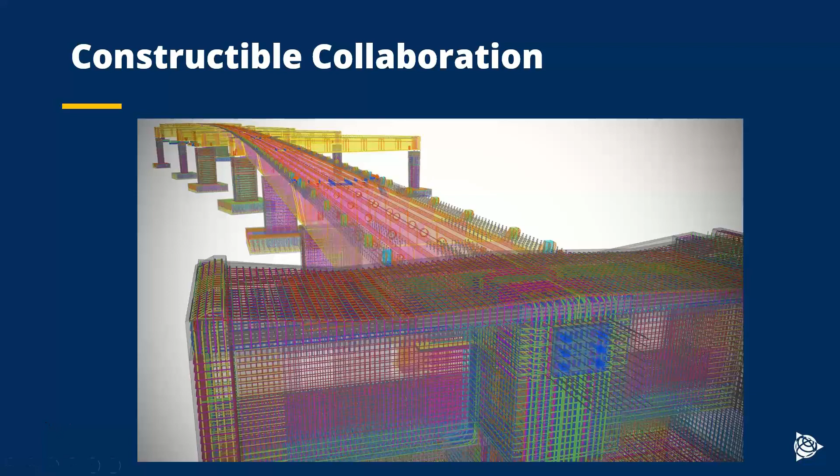So much for the introduction. Now, what is constructable? We'll talk about that. Actually, this is a strength of Tekla. We are well known for being able to produce constructable models and also tools to use the constructable models.

If I may, maybe you missed this, let me just go back a little bit. You can see this is the model of the Tekla structural steel, and this is the rebar with the structure steel that I haven't inserted yet. So if this is how it actually looks in real work, this is as real as it gets on site.

So what's so important about that? That's what we are going to talk about in relation to BIM. For the next few slides, I'm going to talk a little bit about constructible BIM using concrete construction as an example, as I mentioned.

Because we are going to go in depth, constructible BIM covers different disciplines of things: precast, even curtain wall, temporary works, bridges, RC structures, vertical structures, composite structures — all fabricated by different people. So it has different modeling if you go down to it, slightly different, but the concept is the same. It has different advantages, so we'll just take one concrete example.

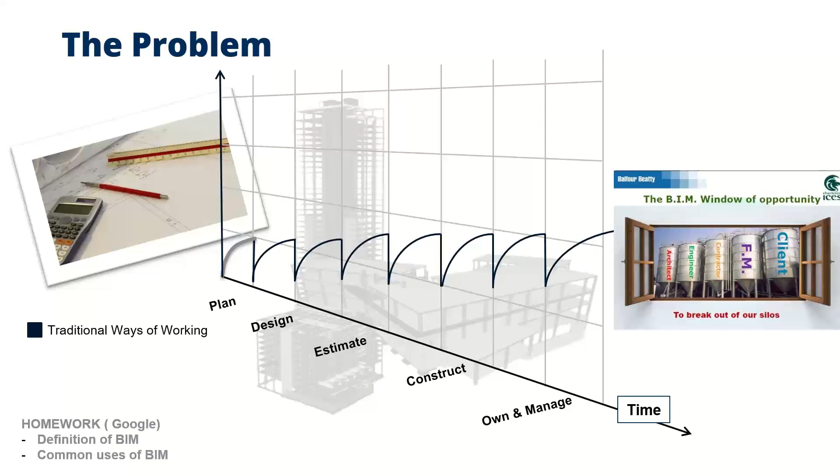All right, so if I'm throwing a lot of things here, generally to share a bit more with the BIM. So the level of development - this is a BIM model example, and then your M&E, structure, steel, whatever you have.

So not all BIM models are done the same. If you want to go to construction, you have constructable BIM. Apart from the concrete geometries, we'll tell this is concrete or what kind of grade of concrete and things like that. You also can use the model to do the casting planning, that is the use of the model during construction.

You need to know the embeds location so you know the reinforcement fits in and can be installed. And you can call up what rebar is needed, the bar bending schedule. You can either cut and bend on site, or order cut and bend rebars, and you can also quantify them - how many of them is it.

You also have temporary works that you can, if you want, do it, but it can be done, and then you can better coordinate your work as well. And then whatever you've done, you connect it to your survey equipment, the robotic survey equipment, to do the auto layout on site to get it accurate.

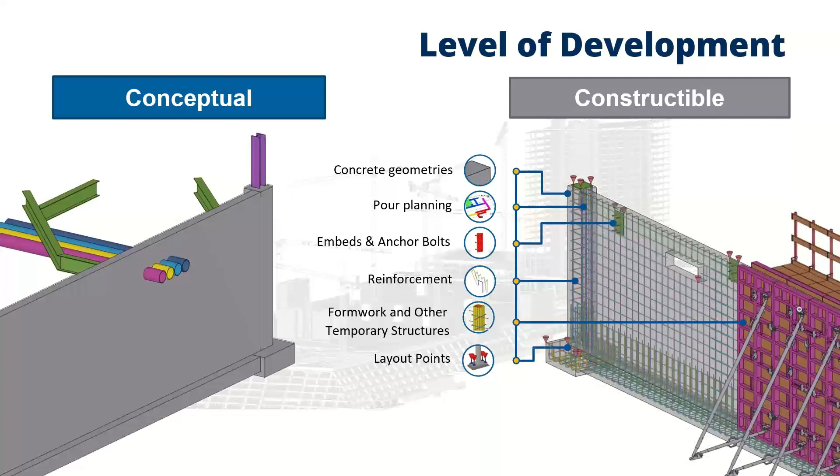So this is just an example, and then add in the rest. If it's structured steel, then you have bolts and welds, even modeled. So all this goes to costing as well, and also goes to analysis as well. And then you have M&E trade coming in and do the coordination as well.

So as I said, I'm focusing more on the reinforced concrete. So this is a reinforced concrete example, and a good example of constructable. Basically, the model is as good as what is needed, exactly needed, what is to be built. The data, the elements are represented as it is. The data is inside so that you can extract them out for use.

You have tools to use it for various purposes, for planning or for quantity takeoff and things like that. First, you must have it inside the model. Otherwise, there's no way you can take it off accurately.

So this is what I mean - so one model, constructible model. You use the model during construction. You can use it for quantity takeoff. It's very accurate. You use it for your scheduling or logistics.

You can use it for pour planning and produce casting drawings specifically to the casting sequence and things like that. You can use it to do your formwork planning and detailing. And obviously you can use it to do your bar bending schedule, rebar quantities, and the detailing to make sure

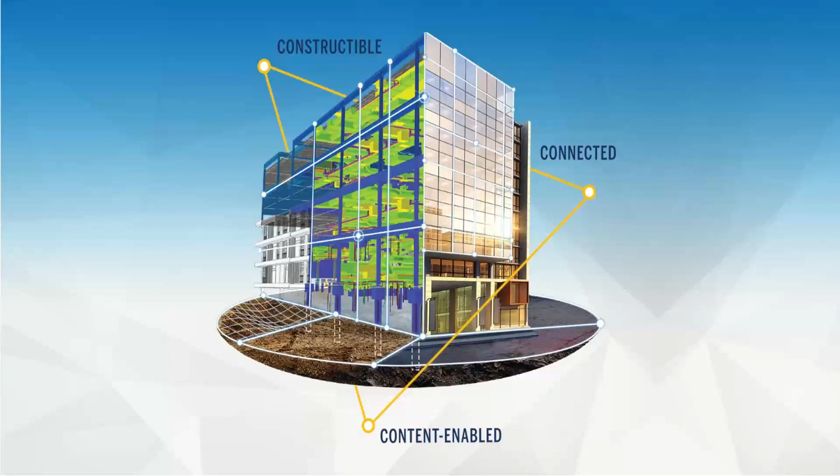Everybody needs to look at the same thing regardless of what software they are using. So connected data, connected people is very important. That's why there'll be another solution whereby in the cloud you can coordinate between the various professions at different stages, and bring this constructible model there to help track the status of the work and have the information at hand, whether it be on handphone, mobile, desktop, browser, or HoloLens, which I don't have time to go into.

Basically, a designer can now design and port the information, analysis, and design over to Tekla, to a constructible model in the case of Tekla. Then that model with the design rebar can be available, and you can start doing the detailing of the rebar plus the constructible model plus the coordination, and then send the information for fabrication. You can also bring the information onto the site to verify, to do stake out, layout, and things like that. So this is the concept of how it can be used for construction.

So as I already have overshot the time, I'm sorry if it's too much for you, but what we will do is continue to learn.

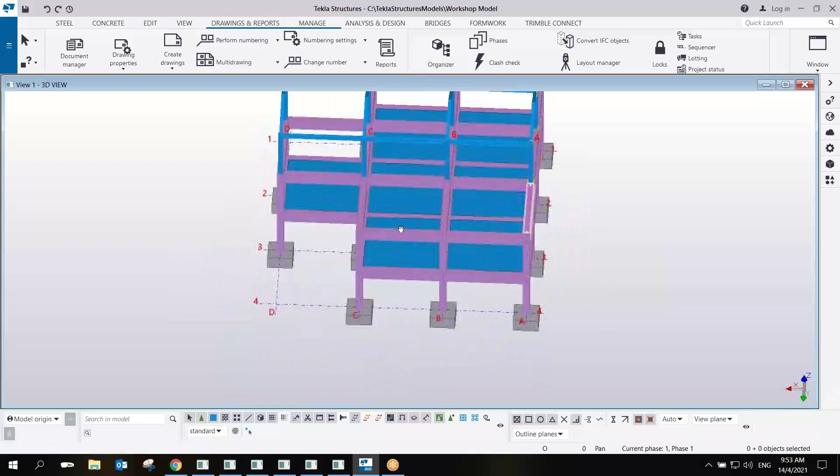If you notice, this is 3D. Since we're talking about 3D modeling software, you can rotate, zoom in, zoom out, and make it transparent. Rotating is simply pressing the control key and the middle button of your mouse and moving - that's how you rotate. Zooming in and out is simply rolling the middle button, roll up, roll down. If you click the middle button of the mouse and move, that's the panning.

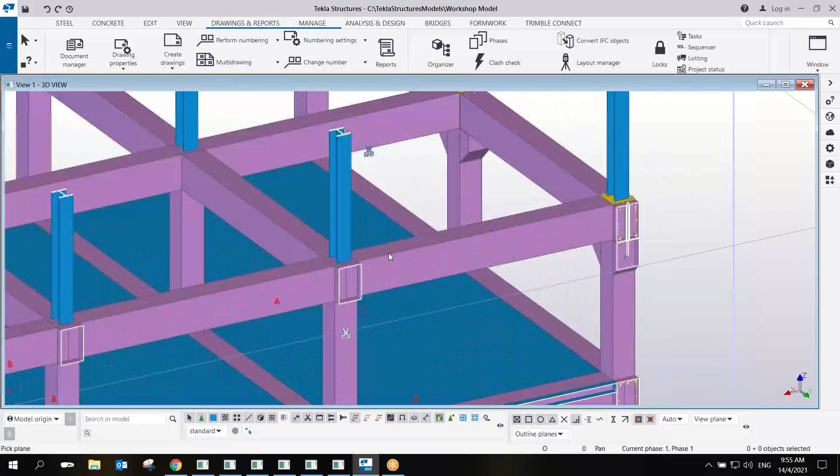If you notice, when you do the clip plane, you can see the information inside. If there is a reinforcement, you can see the reinforcement, and then also the sections like this. And then if you want to remove that, select the scissor and then delete.

So that is how you navigate the model, and then by pressing Control P, it becomes a plan view. Control P again, and this one will become a 3D view.

So now we can start dealing with this model. I can simply delete everything, and then I'm going to show you how we're going to create this simple model. Basically, in Tekla Structures, you have Control I.

In Tekla Structures, there is a grid line here. If you double click the grid line, as you can see, you have the coordinates. This is where you start the model. When you create a new model, you can have the grid line automatically by default, then you can change the value of the grid line. So this grid line, if you notice, there is a 3 into 5,000. Meaning, in the x direction, this is x and this is y.

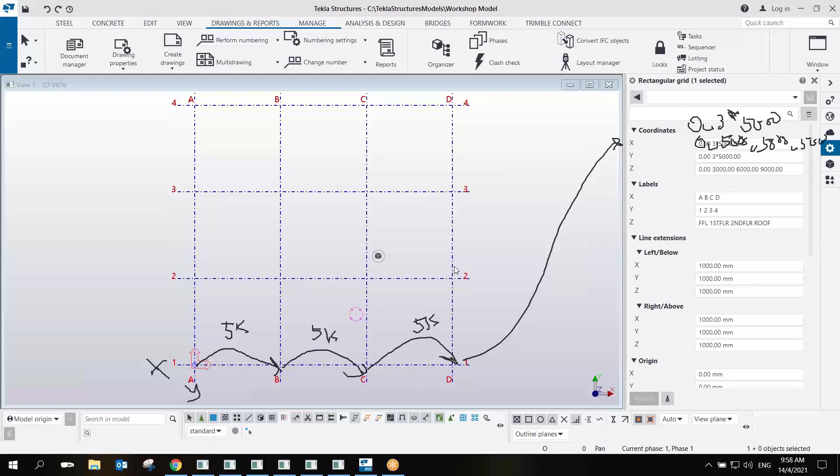So if I erase all the drawing and go back to this, let me just simply change this to 0, 6,000 space 6,000, and then 5,000. If I enter, look what will happen - there are changes in the spacing of the grid line. So if I want to go back, if I type here 5,000 space 5,000 space 5,000, enter, it will restore to 5,000 5,000, and automatically this will become 3 times 5,000. And then you will notice the y direction is the same thing.

Meaning the x and y, this one is what we call a relative value, relative. So this is a relative value, this x and y. Meaning it will start from where it ends. So from 1 to 2, 2 to 3, 3 to 4, and so on. That is the relative value. It's like you're adding dimensions.

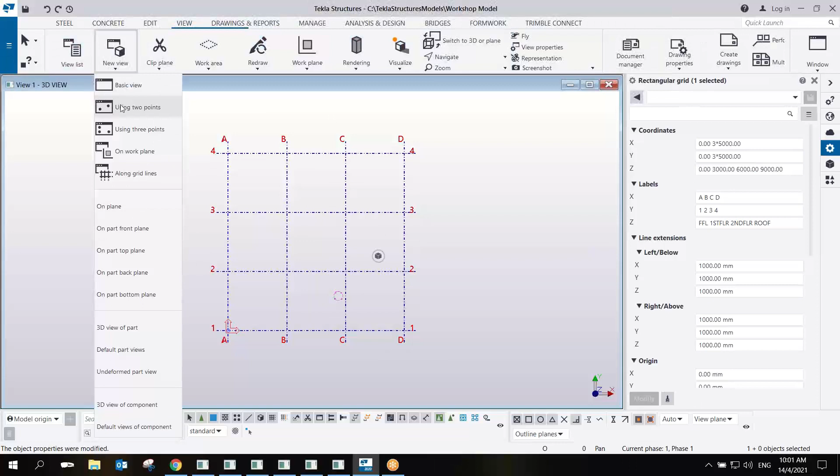Okay, so now for our z direction, for the z coordinates, this one was taken differently. So if I'm going to the z direction, I can go to the view. Under the view, there is a command using 2 points. If I click this command, pick this one and pick this one, so you can see the arrow. Control tab and then control P.

So this is the elevation. If you notice the value here, under this edit you can see the measure. So I'm going to measure vertical distance from here to here. Let me just turn on my snap. So from here to here is 3,000. This one and this one is 3,000. This one is 3,000 also.

Okay, now in elevation, we call this one the absolute value. So meaning for the z direction, this is absolute value. Absolute value meaning the value on the coordinates must always start from 0, from here. Meaning from FFL, or finished floor level, to the first floor, that one is 3,000.

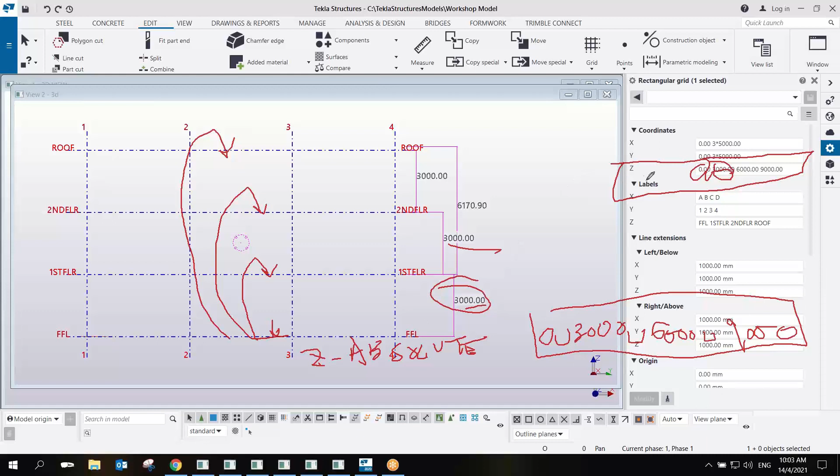Okay, so erase all the drawing and then go back here. If you notice here, so 3,000, 3,000, 3,000, you can see here 0, 3,000, 6,000, and then 9,000. It will be wrong if you put here 0, 3 times 3,000 - that one will not work, and you will not be able to see your grid line in your elevation if you put it that way. So again, X and Y is a relative value, Z direction is an absolute value.

Okay, so I can close this view now. And then since I have now the 3D view here, we can just simply - the label is here, A, B, C, D, A, B, C, D, and then 1, 2, 3, 4. And then this FFL, first floor, is what you have seen earlier on the elevation.

So now what we can do is create the view from each grid. I'm going to select the grid line, right click on it, and then here create view along grid lines. If I click along grid lines, there you go - you can see create. Once I hit create, automatically it will give me the different grid lines. If I open all of this, as you can see here, it will create all the grid lines. But again, in Tekla Structures, there will be a maximum of 9 views to be shown in your window, so maximum 9 views only.

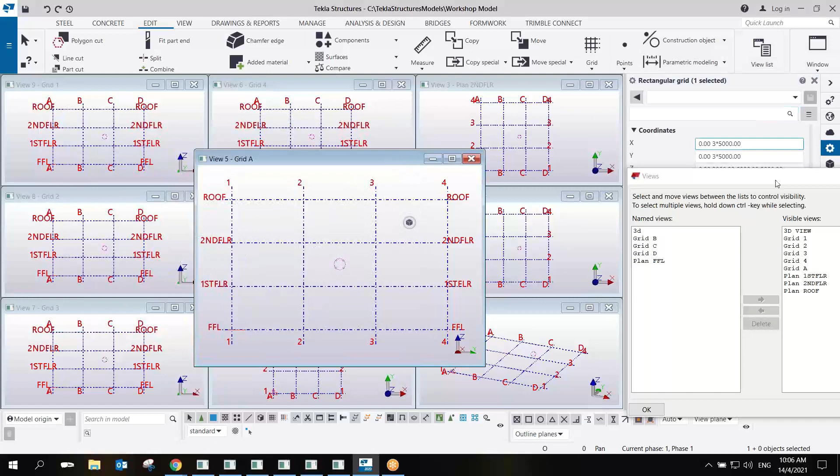Once you want to close all the windows, you can go under this window and then close all windows. And then if you want to see, press control I again, so you can see the view, the named views. So here you have the 3D view.

So you can go back to the 3D view again. This is how, when you close the window, it's not necessarily off, but if you press control I, all the views on the left side will be hidden. Once you put that one on the right side, it will be visible again in the window. Close it and it will be hidden. So if you're not using it, just put that one on the left side.

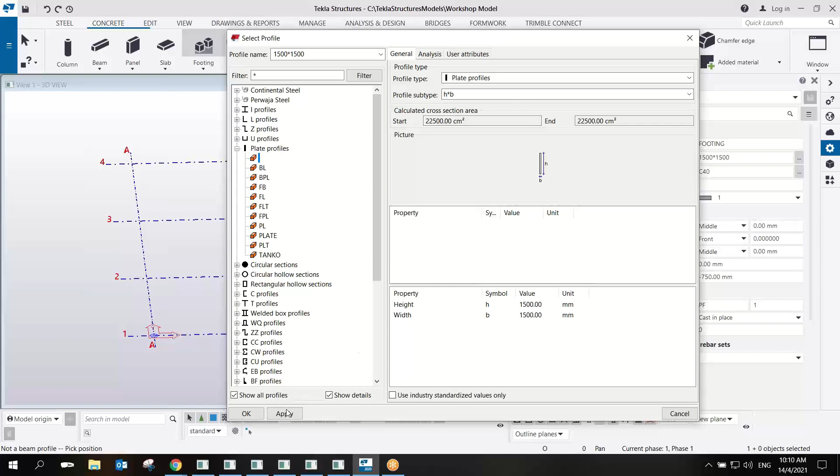If you go to this profile, as you can see here, these are all the profile database in Tekla Structures. As you can see here, we are using this h*b, 1500, 1500. There are many profiles available, but at the moment we're going to use this. Actually it's called plate profile, but you can use this one as a slab or as a footing. And as you can see here, the material of the concrete is C40.

And then the class, and then if I pick here, automatically there will be a 3D model. In AutoCAD, if you want to create a 3D model, you have to just create this rectangle and then extrude. So this one, just simply pick point and then you have a 3D model. This 3D model is not just a 3D view - let's say for example top is 0, this one is 0 on the global coordinates, bottom is negative 750. If I type here negative 800 and then enter, it changed to negative 800, the height of the footing.

Now look, if I inquire this part, immediately I can get the properties of this. So I can even get the report. What report? Let's say, for example, I want to see the area of this footing - I can get the area. I can even get the volume of the concrete in this pad footing. Immediately the system will calculate for us the volume, even the weight of the footing - it will give you the weight. So you don't have to calculate that one using your calculator, because Tekla Structures will be able to give us all the information that we need for fabrication or for site.

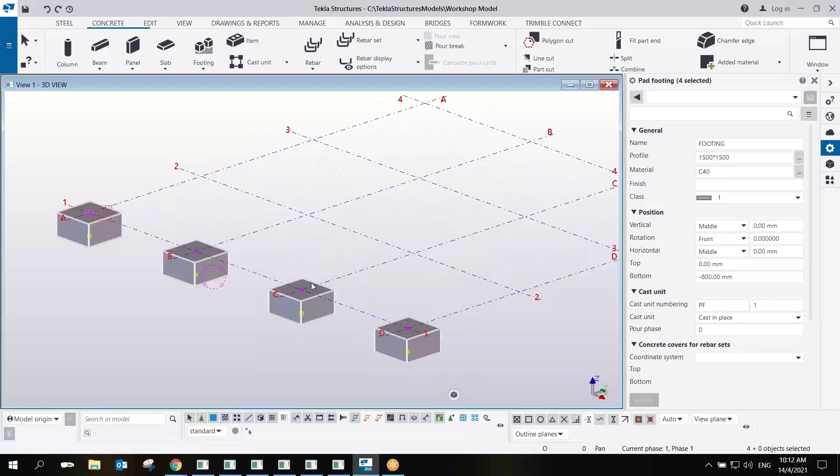And then if you select this one, we have an option to copy. If you right click, copy linear - meaning you can pick from this point and then select the direction. I'm going to copy to this direction. Look, that one is 5 meters. If I click here, automatically the 5 meters will go to the dy, and then the number of copies, how many - 1, 2, 3. So you type here 3 copies and then copy.

So you're going to have all the pad footing to this intersection. You can also, if you like, if you don't want to copy, just simply click the footing and then pick one by one. So that's the same thing.

All right, so anytime you can change this. Let's say, for example, this one, I want to change the size of this to 1.2 by 1.2. Enter. So you can change it, and you can even change the color of this one only.

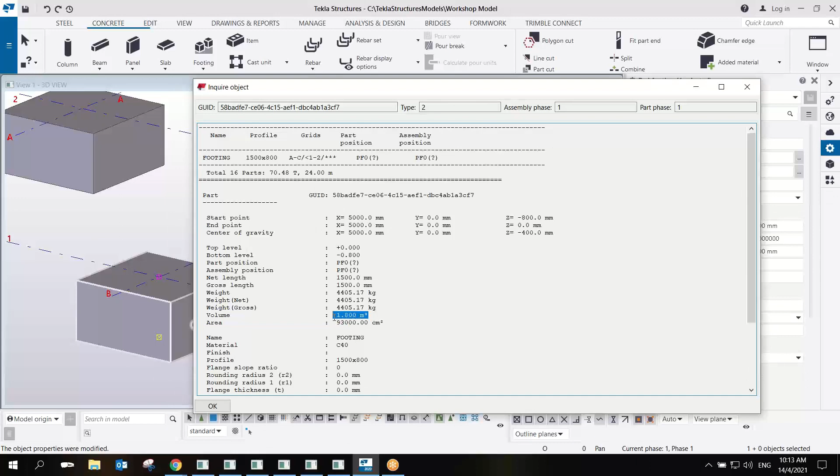So you can do that immediately. And then, if you inquire this one again, the information is totally different. See, the volume of the concrete is 1.152, and then this one, if you inquire, the volume is 1.8. So as you can see, to check the information, you can always inquire the element.

Okay, and then the next one is we can now add the column. So for the column, just double click again, and you can see here the column is 400 by 400, so I can accept that. Let's say I'll choose number 11 here, then the top will be 3 meters, meaning this will be the height of our column. Remember, in our grid line, the first floor is 3 meters, so it will stop the column there. If I click here, 1, 2, 3, 4, that will be the 3 meter.

And then if I copy, again, copy special linear, the value earlier is already saved, so all you have to do is hit this copy, and then you have now this column.

Okay, and then we can add now the beam. So under this beam, select it, and then under the properties of the beam on the right hand side, you can change the size of the beam here. Let's say instead of 600 by 230, I'll just use 600 by 400.

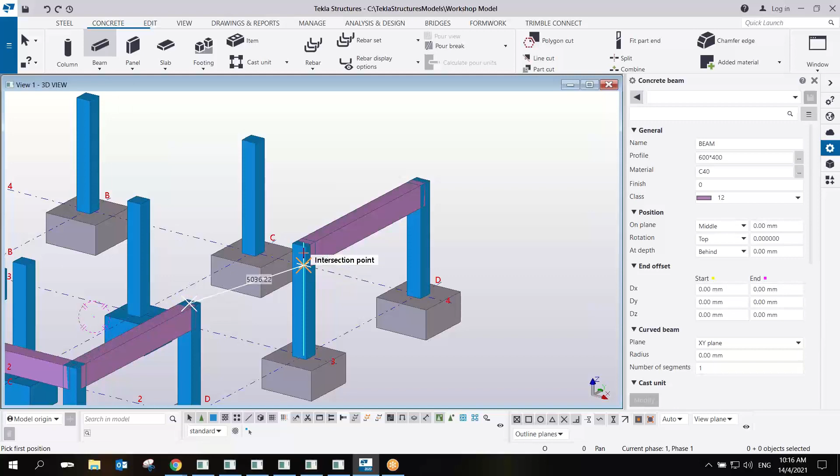So by simply rotating that one, I can just select and copy special linear. Same thing, I can just copy that one to have that beam, and then here I can rotate to the X direction, and instead of Y, I will make it 0, and going to the X direction to the left, it will be negative 5,000, and then copy. So you have now this frame.

Okay, and if you're okay with this one, I can just simply copy this, right click, and then copy special linear, and this time this will be copied to the Z direction, so 3 meters, and then copy. So I have now this framing.

Okay, so now this one is made of concrete. Now let's say I want to add a steel structure here. Actually, the good thing with Tekla Structures is even if I started this with concrete, I can convert it to steel.

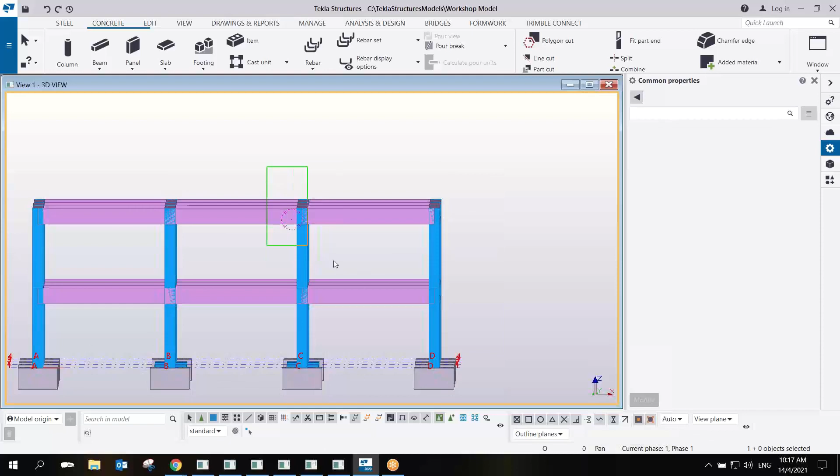You know that I can simply copy this part, then again right click, copy special, linear, and then copy, delete duplicate. Okay, so what I will do here is I can just simply change this value.

I select this one, change this value, I will go to the profile. So meaning from concrete, I can just simply change this one to a structural steel I section. Let's say, for example, UC, and then I can use the UC 305 by 305 by 118, and then apply, and okay.

And then change this color to, let's say, red. And then this one, the material, because I choose the steel, I can now change the steel material here. Let's say S275JR or S275. Apply, and okay, and then modify. So look what will happen - this one will become a structural steel.

Now, if you want to rotate the structural steel, the flange must be on the other side. So again, by simply selecting all these elements, and then look, once I select this element, and then I go to the properties - oh sorry, select this column - you will notice here automatically it becomes a steel column.

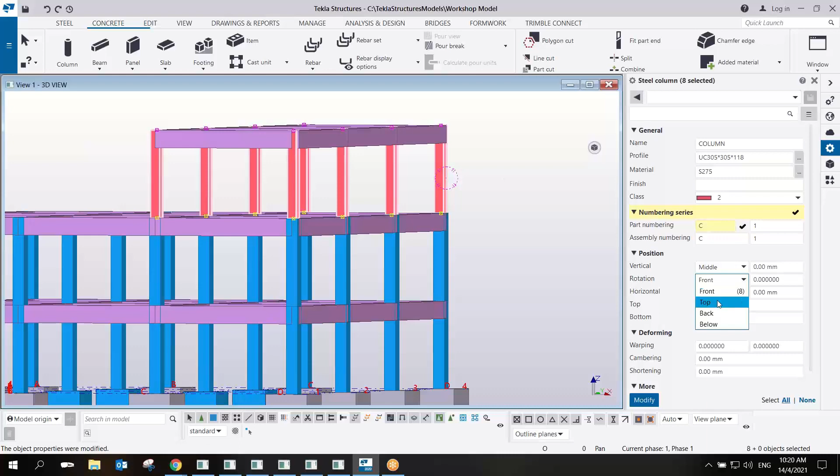So here, if I want to change this one, I can type this one as C for the part, and then this one, instead of front, I can put that on top, and then modify. So look, it will be rotated there.

Okay, and then for the beam, same thing. I can select all the beams here. So under this beam, I can now change this profile. So instead of 6 by 400, I'm going to use the I profile here, UB section, and then I can use the 305 by 165 by 40, apply and OK.

So I can change again this one to this material. I will change again to steel material, S275, apply. And then maybe I can change the color to 3 and then modify. So there you go. So you have now the beam, okay.

All right, so let's say, for example, I have another. Okay look, if I select this one and then copy, I can use the simple copy command, not necessarily the copy linear, so I have another copy option. So I'm going to copy from this point to this point.

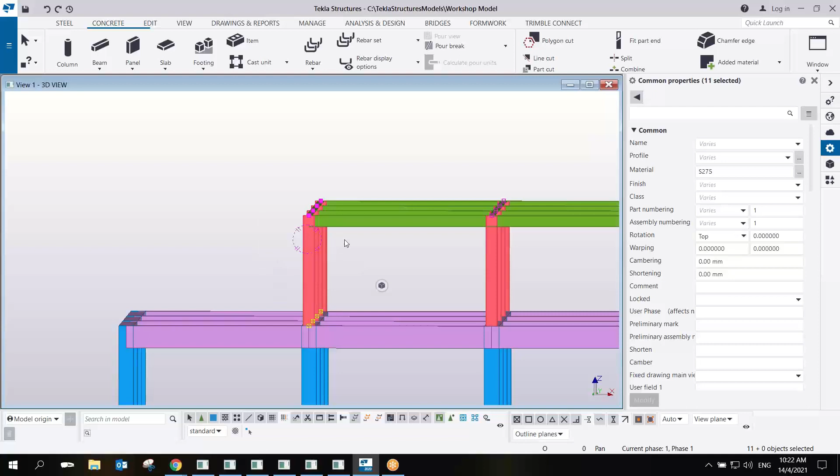But this time I want to make this one as a slope. So to make this one as a slope, I can just simply select all of these elements, and then by simply selecting the handle, this handle, the node, okay? I can select the node, alt by pressing the alt key and then control alt key and then hold and then make a window. So look, I selected all the node.

So now what I can do is right click and then move linear, meaning I can move this one Z direction 1000. I will move 1000 and then move. So look what will happen. So I have now this slope beam.

Okay, so I can have now the slope beam. Now if you want to make it steeper, again press the alt key and then select, right click, sorry, alt and then select window and then move linear. So I can add another 500 millimeter and then move. Ah, it doesn't move, okay.

So I can just simply select this and then alt key, and then again alt key and then select the handle of the column and the beam and then here, move. Okay, there you go. So you have now the slope here.

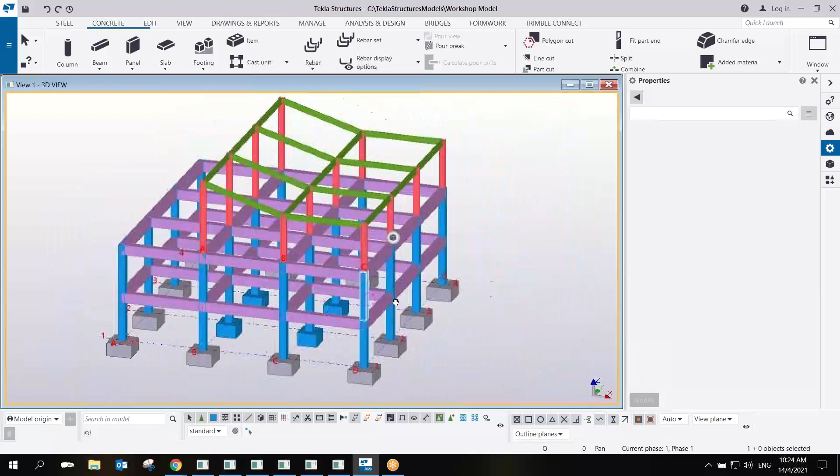Okay, so this one is now the geometry, or the structure. So this is the structure now. So now, enable for us to do the details. Of course, we can do a lot of details here. So let's say, for example, first, maybe I'm going to add a connection for the concrete.

So that at least you have the idea how we're going to add reinforcement to the concrete. So we make it transparent. So we're now going to add a connection, and then under this application and component, as you can see here, I can simply type here footing. So footing, it will show to us all the footing connection or component.

So we can use the pad footing number 77. So if you double click on this one, if you double click on the pad footing, as you can see here, all right, double click. All right, so you can see here that there is a, sorry, let me just close the window. Cancel.

All right, so here, as you can see under the pad footing, you have now the primary bar, the secondary bar. So primary bar meaning you can specify the size, the thickness, the diameter of the bar. This one at the moment 16 bar, and then you can see the spacing 200 by 200. So here you have the zoning, you have the attributes. So at the moment I'm going to use the default one, apply, and okay.

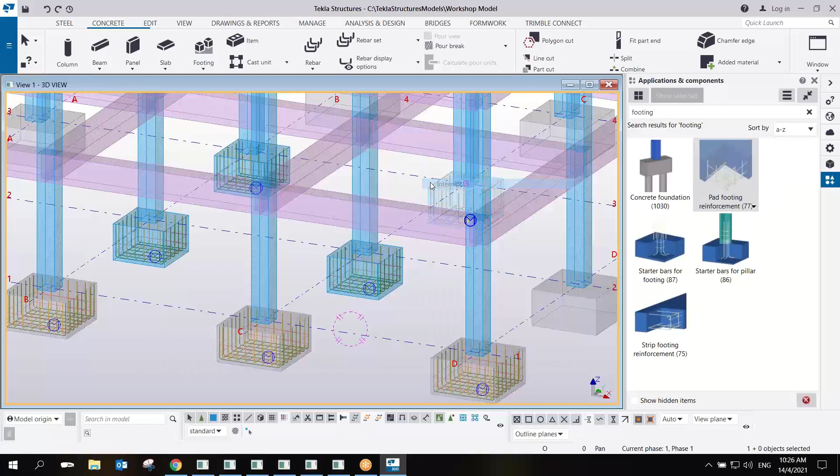So just simply, okay, look, the good thing with this is if even I click on the different size of the footing, that one will work. And also, let's say for example, this one, this footing, I change it back to the same size of the other footing, 1.5 by 1.5.

Okay, and then modify. See, so automatically the reinforcement will change. That's how the system works in Tekla Structures.

Now let's say here I want to add the starter bar. So starter bar, this one. If you double click on this, you can change the location. Instead of 500, I'll put here 400 because 400 is the size of my column, so the cover thickness. And then here it will extend up to 800. Apply. So look, if I select now the footing, automatically there will be a starter bar placed there. So that is the starter bar, and that one is to connect the footing to the column.

Actually, this one we can change a little bit. In the location we can make it 350, so that our reinforcement of the column will not collide to the reinforcement of the starter bar. Click OK. So if I apply that one now here, you can see the reinforcement here, and here.

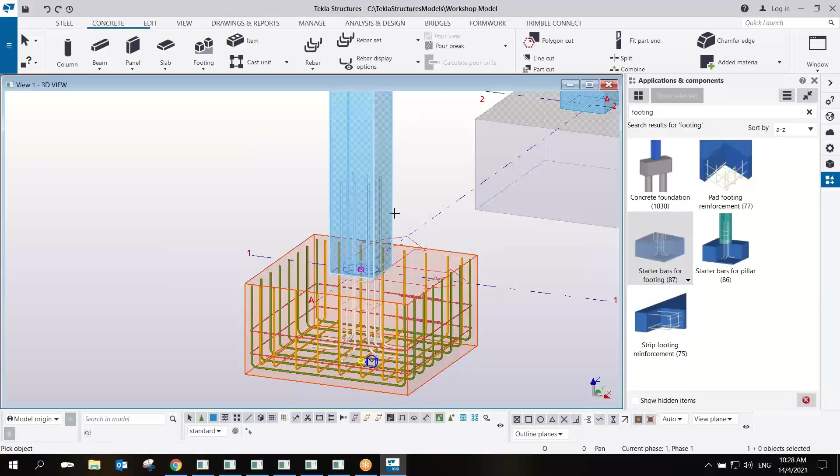Okay, so now to continue, we can add the reinforcement to the column. Just simply type here column, or I can type the number, let's say 83, if I'm not mistaken. Yes, 83, rectangular column reinforcement. You can take note of that one later when you try it on your own.

So just simply double click on this, and then again you can specify the size of the reinforcement, the stirrup spacing. As you can see here, you have size 25. You can make it 20, and then the bar end, the position, the intermediate link, the stirrups. We can make it 200 spacing for the stirrups. Apply. Just simply select the column, and then you can have this reinforcement in the column. So column, column, and then column.

All right. Now I can pick on the top column as well. But the thing here is there is no connection between these two columns. Meaning this first column, I can extend the main bar so that it will be extended to the other column.

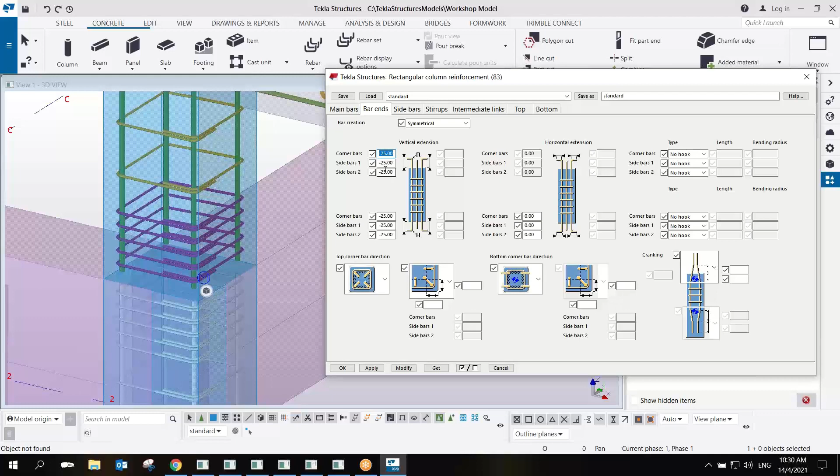So if that's the case, you go to the bar end, and then here, as you can see, I can use the cranking. Under the cranking, instead of negative 25, I'll put here 1200 and then modify. So there you go, as you can see here, this one is exaggerated cranking.

So maybe we can just simply put, let's say this one is 200 and then this one is 200. Modify. Oh sorry, maybe this one is 0. Modify. Okay, and then this one is 50, 50. Something like this. So there you go. As you can see here, maybe we put a little bit more, 65 and then 65. Or sorry, 60. Okay, so that one is okay now. I'm going to apply this. I think I'll make it 55. Yeah, this one, apply, and then okay.

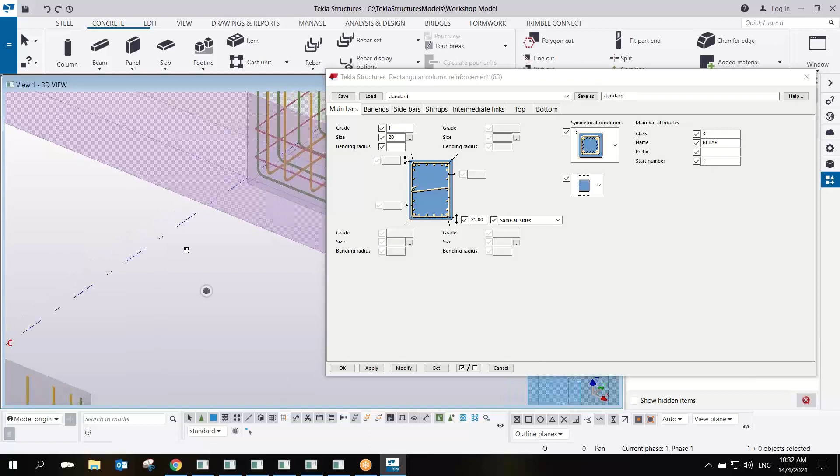So this time, since this one is already existing there, all I have to do is open this component, and then select all the existing reinforcements. So this one, shift this one, and then this one, and then modify. So once it's modified, this one will be changed. See, so that one is connected now.

Okay, and then for the connection of the beam, I can use number 63. Take note of this one again, so this one is for the beam reinforcement. So the beam reinforcement, similar thing. If you open the component, you can change the value here. Let's say I'll put here 20, and then the hooks, the stirrup spacing, let's say I'll put here 200 as well. Apply and okay. So all I have to do now is select this beam.

Yeah, that beam. Okay, and then here, if you notice, the connection here is for the CIP, but this time I can add a different connection between the column and the beam. Let's say I'll use the Corbel connection. So if this one is a precast one, the beam will be seated to the Corbel in the column. If you notice here, just simply select the column and the beam, and you're going to have the Corbel. If you want to change the Corbel size, you may do so here.

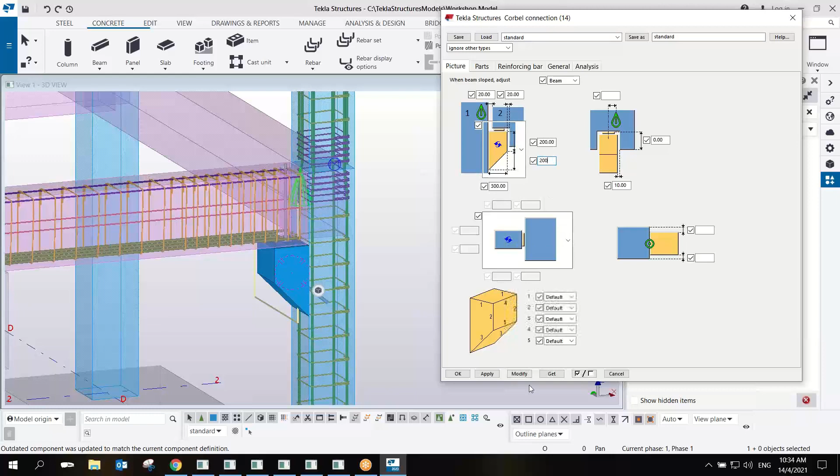Let's say I'll put here 11 to make it the same color as the column, and then under here I can put 200 and then 200, modify. So that is the Corbel, or maybe 250. Okay, so this is our Corbel. This one also 200, smaller one. So if you're okay with this one again...

Apply, and okay. So all you have to do now is select the column and the beam. So control for column, beam, column, beam. So column and beam. There you go. As you can see here, oops sorry, so I can select this one and this one, this and this.

So that's how you add the Corbel. All right, so now we have already the connection for this. I'll just redraw this one and then Control 2. As you can see here, you have already the proper connection for the column and then the beam.

So this time we're going to move on to the connection in our column. In the connection of our column, we add the base plate here first. Okay, the base plate. So what will be the base plate? So here, Control 4 again.

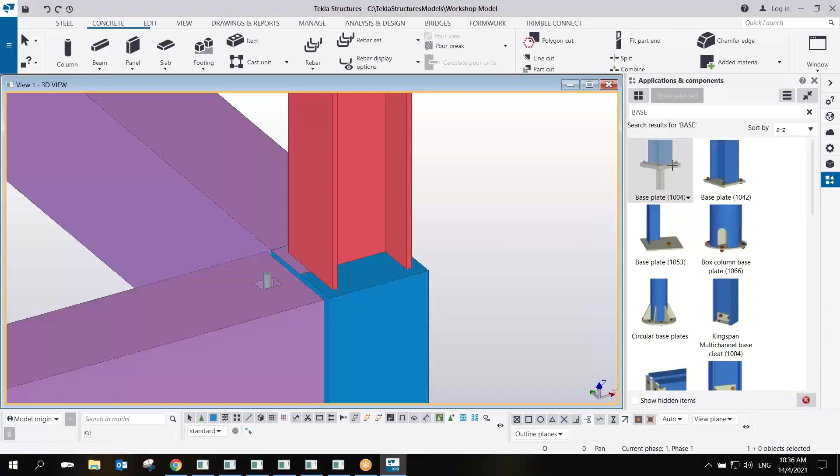If you notice here, I can just simply add here base plate. So and then I have now this, let's say, base plate 1004. So this time, this one is for the steel connection. So if I pick the part, let's say my plate size is 20 thick, and then the parameter general,

let's say I'll put here 6, and then the bolt, no, the bolt position must be inside. Meaning I'm going to put here 2, and then let's say 100, then this one also 2, and then 100. So apply.

So pick the column and then pick the position. As you can see here, that is the position of the bolt. By the way, if you want to isolate this particular section, you can just simply select and then right click, and here you can see create 3D view of part. Meaning you can isolate this particular connection only.

Okay, so now if we want to check the position of our bolt, if you notice, even when I put that one on the bolt, it creates the anchor rod. But let's check first the position. So instead of 100, I can change this one to maybe 150, and then modify.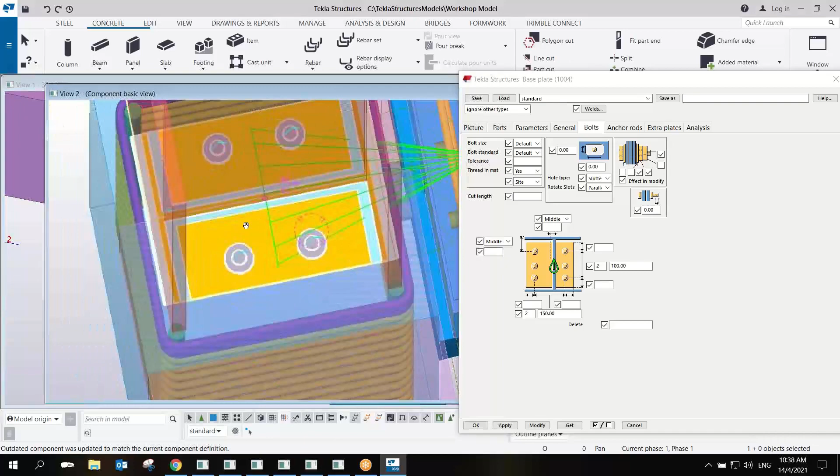150, modify. All right, and then here I can put here maybe 120. And then for the picture, if you notice here, if I want to put here an additional 10, and then 10 for the welding, so that one will be extended to 10. It doesn't. Okay, maybe negative. Yeah, so here you have a negative 10.

And then for this, you can go to the part. Actually, this one you can inquire the size of the column. As you can see here, the web is 307. Then if this one is 310, then 330. So the width, I can put the width of the plate as 330.

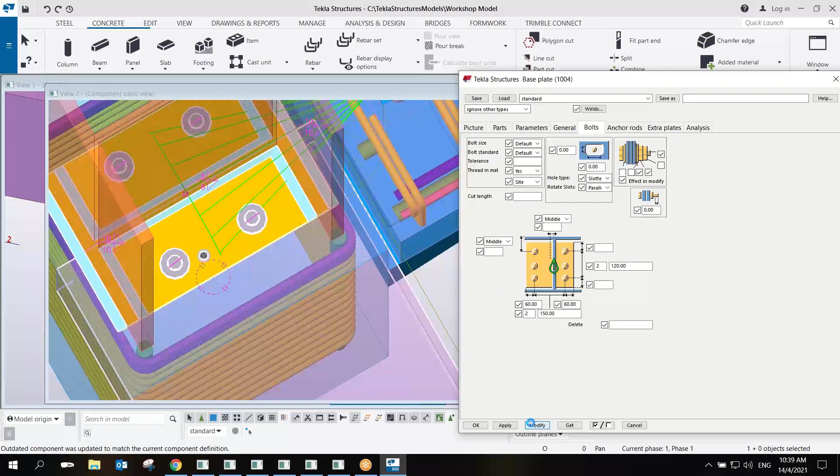No, there's no width here. So meaning I can just simply put that one here under this one. Maybe I'll put here another 60 and 60. Select this one and then modify. Okay, so it's not enough. I'll put here 80 and then 80. Modify. Yeah, I think that's good enough for the column.

Okay, so if you're okay with this one, then for this anchor rod, so here you have choices here. Let's say I'll use this one and then modify. No, this one, just a straight one. Yeah, so that one is your anchor rod.

Or actually, this L shape must be okay, but I need to put that one on the bend to the outside. Yeah, something like this. Yeah, this one should be okay. So if you're okay with this connection, all you have to do is to apply and okay.

So meaning for all the columns, I can simply select this one and look, if I select these two columns and then select one position, it will add the base plate to the column. Actually, even if I select all the columns here, even if these columns are different size, it will work. So if I pick one position, it will create the connection to all the columns. Control 2, as you can see here, you have now the connection for all the base plates of the column. So now let's continue with this connection.

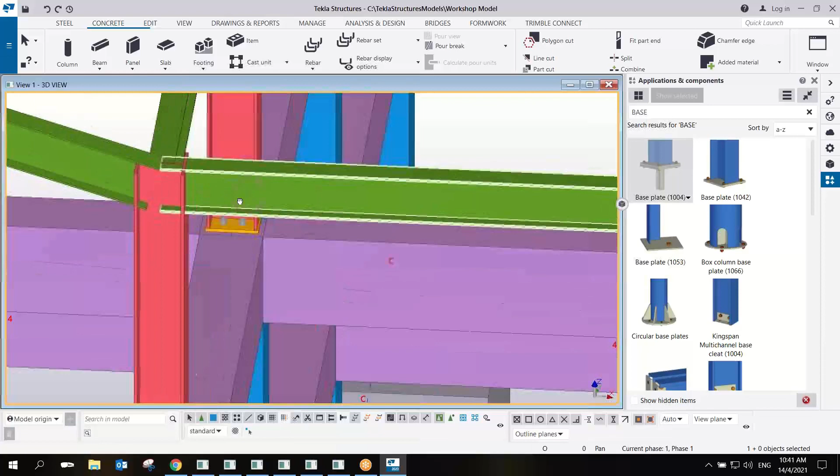So here, if I want to have a haunch connection here, I'll type number 40. So haunch. Again, open this haunch connection.

So you can see here, you have the parameter again. Let's say we don't want this stiffener. You have a general setting, let's put here 6 again, color yellow, and then the haunch. As you can see here, I have the 500 and 300 here, the bolt information there.

Under this one, I'll put here 0, apply, so that it will be flush to the top of the beam. So select the column and select the beam. Then you can see that there is a haunch.

Now, in Tekla Structures, we do have this option to do the clash check. Let me just show the bolt modify. If I select this and then select this part, show only, select this one and then right click, clash check.

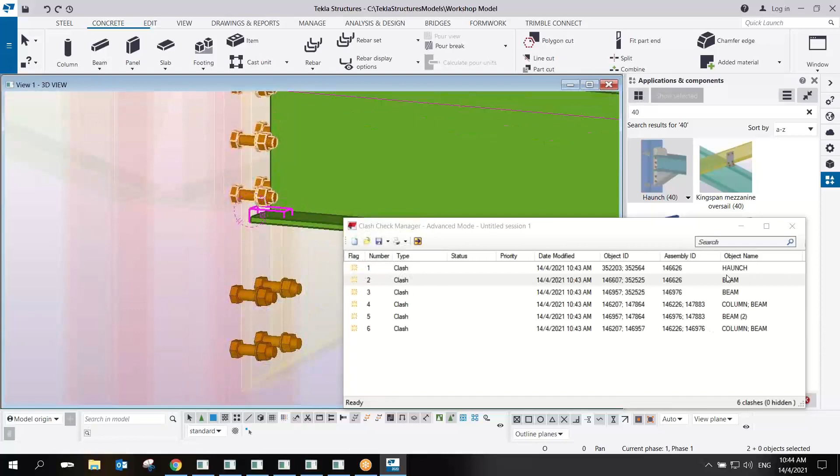So this will give us a warning that something is clashing. Let's say, for example, if I press Control 5 and then Shift 5. If I select this beam, meaning this beam to this, there's some minimum requirement of the bolt to the flange, so we need to adjust the bolt. And here, this haunch - not necessarily clashing, but the problem here is the range.

You cannot tighten the bolt here because of the slope here. And then column and beam - meaning this column and beam doesn't have the connection yet, that's why there is a clash.

In that case, we can now go back to this component and change the position of the bolt here so that we're going to clear the clashing.

Under this bolt, from let's say top, if I type here 100, modify, zoom in, so this is considered as the top. I type 100, and then this one I can put as middle, and then I'll type here 2 into maybe 80. Sorry, we can make this one as 3 into 80, so that will be more spacing.

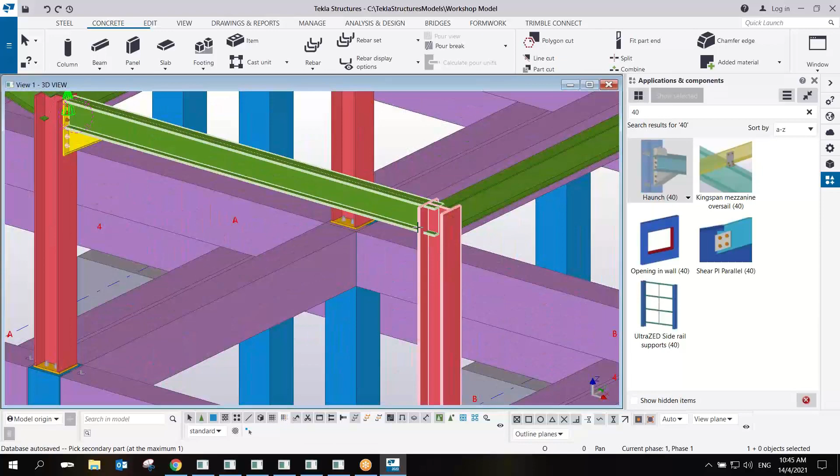Now that we are okay with this, again we're going to apply this one, and then select again the haunch, and then select this column and this beam. So you have now the haunch.

Now for this connection, we can use connection 187. Again, double open the connection, and then we can do some adjustment.

From here, let's see, plate, let's say 10, and then the bolt - instead I will put only one, and the plates here I'll choose this value, and for the bolt here the picture I'll put here 10, and then the bolt, let's say middle, so I'll put here 3, and then 80 again, and then this one should be 35, 35, then 35, and then this one is 35.

Apply. So select now, let's say change this one to 6. Apply, and then select the column and this beam, and you can see here I have now this connection, shear plate connection. Apply again, select this one and this, so you have now the shear plate connection.

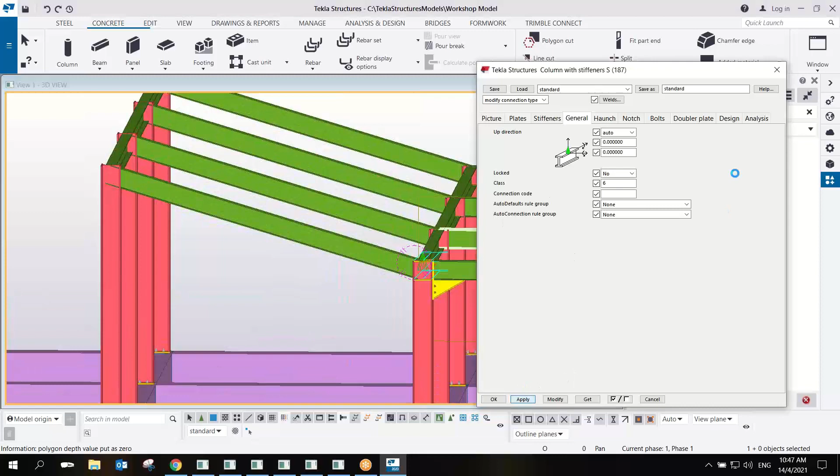Now there is one thing that I need to clear here, because I'm going to apply this one also here, but there's an issue here because of the slope here.

I may change the height of the column, extend a little bit. So this column, I'm going to add additional maybe 100. Let's say 9,100, and then modify. There you go, so that I can now add the end plate connection here.

So I'll type here end plate connection 144, end plate, or you can type end plate here, to connect the column and this beam. As you can see here, again, open the end plate component.

But the thing here is, there's one thing that I need to change here, the bolt - I can add here another, let's say 3, and then modify. But the thing is, I don't need to make it as a middle, because I need to clear that one to the stiffener here on this type. So here I will say 120. Let us check 120, okay, so that 120, and then 3 into 70.

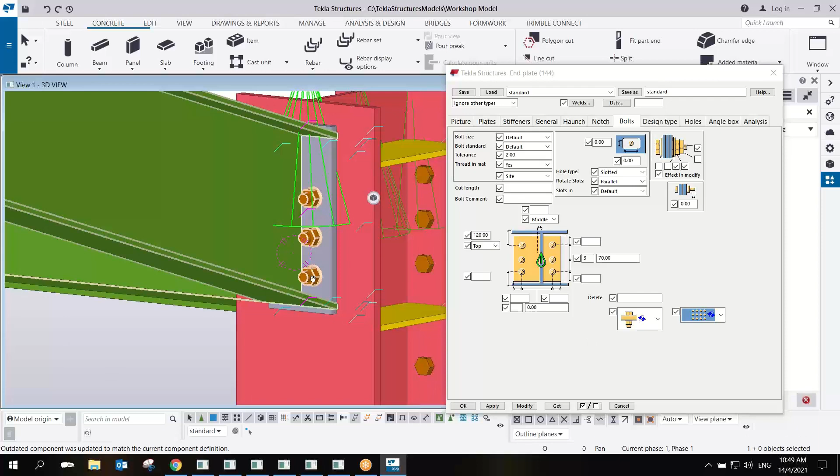Okay, so maybe this one is a little bit tight, but I think it should be okay. Or maybe I'll put this one here at 110. There you go. And here I'll type 120, 2 into 120, and then 40, 40, modify. All right, apply.

And this is our connection for this part. So we will simply copy that one to the other side. But this time, this one will fall to the bottom. So in this case, I need to change the first downhole here to 60, modify. So there you go.

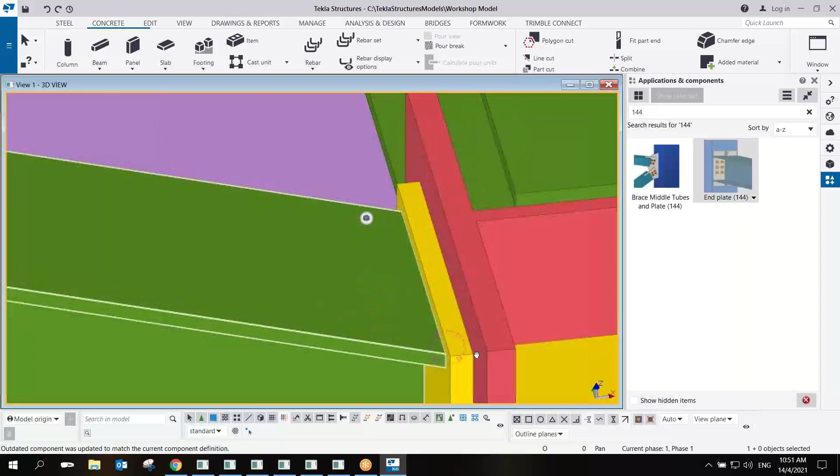So to add the purlin, I can model it by simply changing this. I can go back to this grid one. Under this grid one, I can create a roof plan here, a true roof plan. So new, I can save a true roof plan here, a true roof plan.

Then this one is, let's say, 500, and then 500, 500, apply, and okay. So pick here, and then, oh sorry, using this.

Okay, so this one now is the true roof plan. So under this true roof plan, if you notice here, this is the true roof plan on the right side, and then I need to change the UCS. I can pick on the parallel view. Look, if I click here, this UCS XY will be transferred to this position.

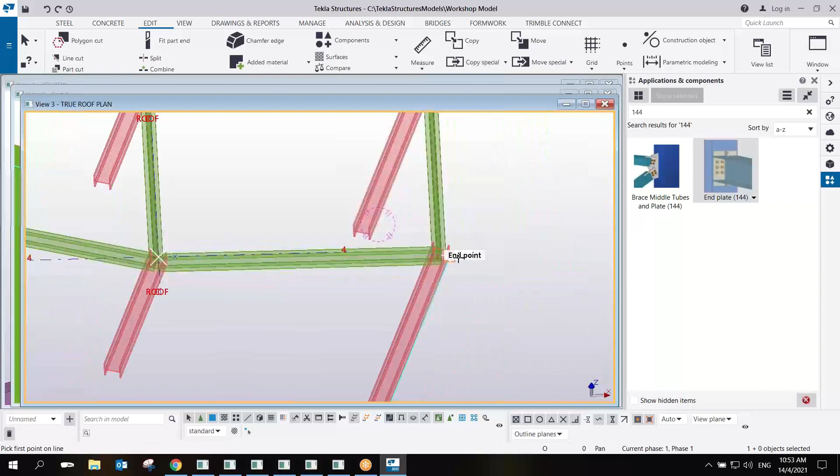Okay, cannot see the... okay, so let me just change this one to work plane. Oh, I cannot find it. Okay, so what I will do, since the grid line doesn't extend, I can use my construction line here, and then put it straight.

And then this time I can now add an extension point here. So let's say from here another 300, and then I'm going to divide this one to, let's say, 1, 2, 3, 4. So still under edit, go to points, and then here I have the online. I'll type here 4 points, apply. So meaning I'm going to divide from this point to this point, adding 4 points, and that one will be my division.

So here, if you notice, if I measure this one to this one, our purlin distance is 893 to each other. So that one will be our purlin. So now I can add the purlin here.

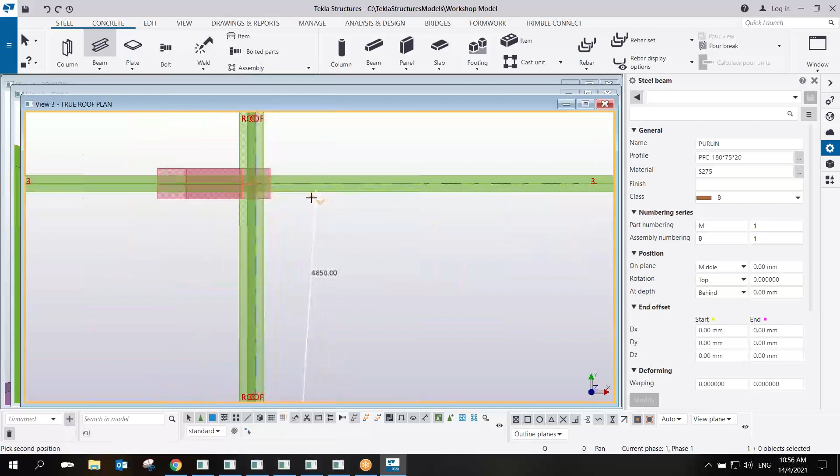So pick one, and then here perpendicular 5,000. So look, now as you can see here, it will go along with the slope, but of course this one we can change the rotation.

So if you select this purlin and then select this contextual toolbar, you can see the positioning here. If you pick this circle, and then move, see, I can put it this way, 270. And then the handle, I'm going to put this handle to the edge of the purlin, so I'll just click here, or this one, yeah. And then...

Okay, so if you notice here, it will be placed on the top, but of course I need to adjust this one. Front, I put 10 millimeter, modify, yeah. So there's a 10 millimeter adjustment to the top of the steel.

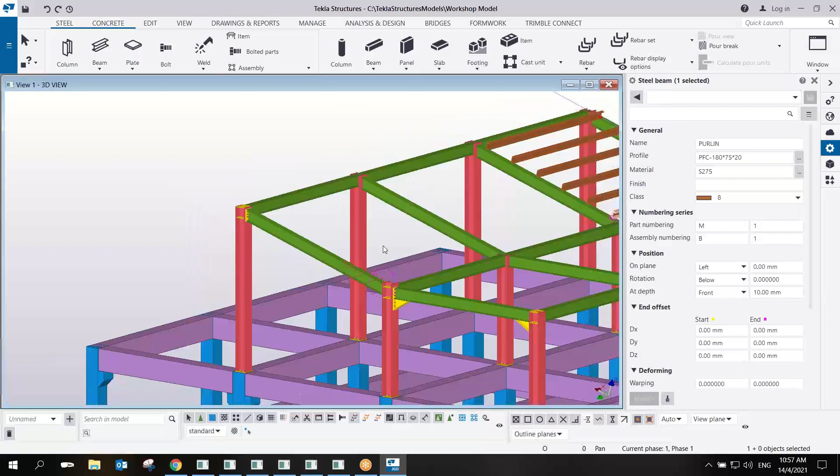So now, if I'm okay with this, I can simply right click, copy special, linear. So from this point to this point, and then 1, 2, 3, 4, 5 copies, and then you have now the purlin. So now I can close this, and here I have this purlin here.

Change the UCS back to the original. Go back to the work plane and click parallel to XYZ, then click change. So the UCS goes back here, and then for this purlin, I can select all the purlins and copy, right click, copy, linear, clear. This one is negative Y, negative 5,000, and then how many? 2, then copy.

So you have now the purlin there. Once you have the purlin, you can also select it, and if I select the purlin, it automatically gives me the rotation or angle of the roof automatically placed because I used the UCS earlier. So now if I want to add the girt here, I can use the steel.

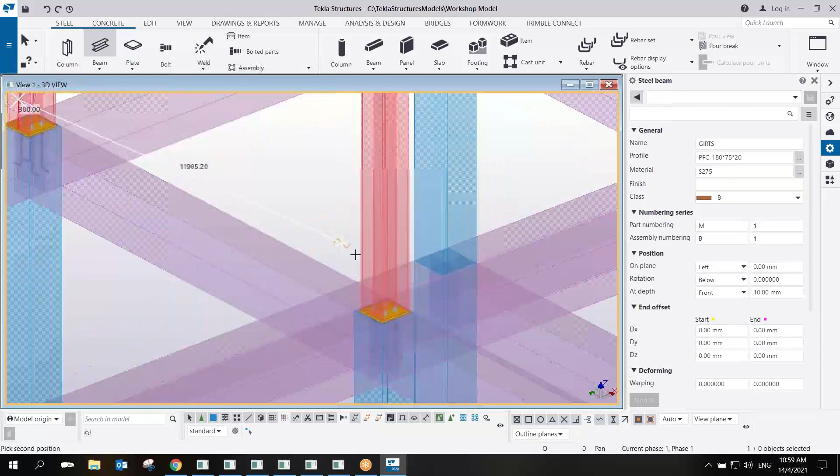Steel beam, then I'll type girts, same thing. From this point, control, then I need 300, and then here 5,000. I can just simply type 5,000 from the keyboard, and there you go.

Now I can rotate again, and then change the position, and that will have a 100. If you're okay with this one, I can just copy linear. This girt, I'm going to copy going up, let's say 1 meter. Maybe how many? 1, 2, 3. Let's say 4. Let's see. Okay, there you go.

So that's how, or maybe I'll just adjust this one a little bit. Move special, this one, let's say negative 200. Modify. Why did it change? It doesn't change. Move special, move, okay. All right, so I hope that one is clear.

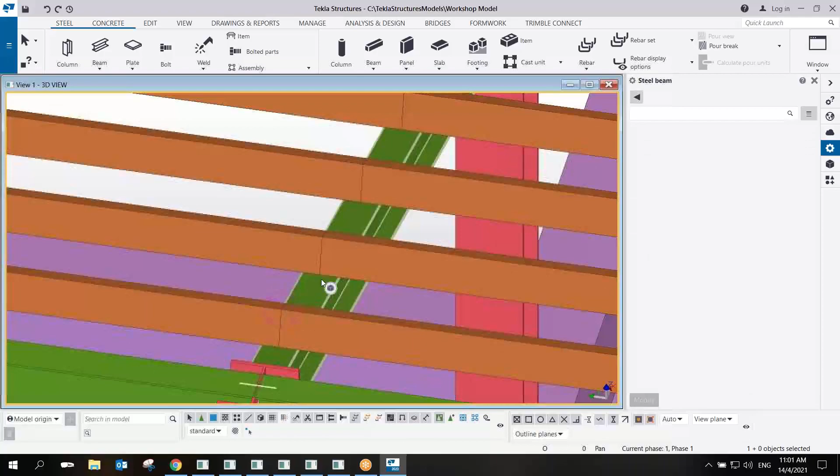Now I have the purlin, and I can add the connection. For the connection here, actually there are... I think this one is wrong. Actually, the cleat should be on the other side, but let's see. Actually, this one should be... oh, actually it's wrong. Anyway, it's okay. Let me just put the cleats on the top, but actually the cleat must be on the other side.

Anyway, to save our time, I can use the connection number. Let's put it on this way. I'll use connection number 1. Okay, this one. So if I pick this column and this 1 and 2, middle button of your mouse, then there you go.

So as you can see here, I can change this one to... all right, so the cleats, I'll put the cleat as angle, let's say 100 by 80 by 6. Modify.

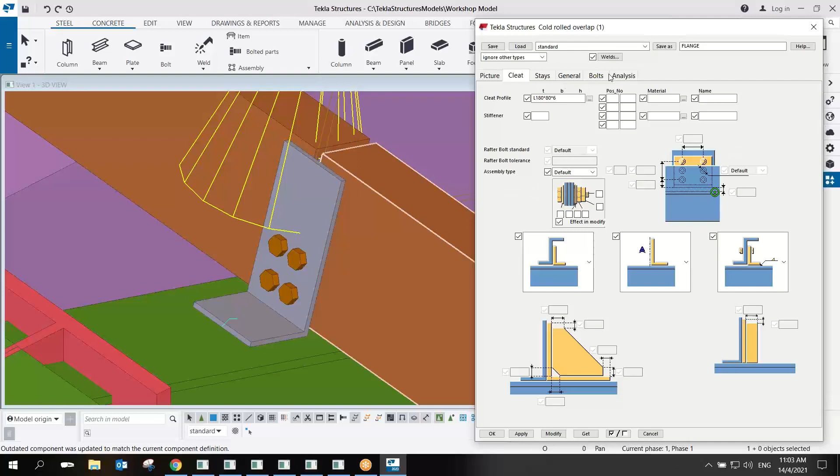And then the bolt, I'm going to use 12, and then the position of this one must be, okay, the picture here I'll put 5. Modify. Okay, and then the bolt here, this one is welded to the rafter, this one must be 2, and here it must be 90. Okay, and then this one must be 30, and then 30. Okay, and this one 2, I'll put here 100, and then 40, 40. Modify, and there you go.

So perfect, so I have now the cleat connection. Modify, apply, and okay.

So now I can just simply add that one by selecting this rafter. 1, 2, 3. 1, 2, 3. 1, 2, 3. 1, 2, 3. And 1, 2, and 3. And how about here? This one, 1, 2. Okay, so meaning, let us adjust this one.

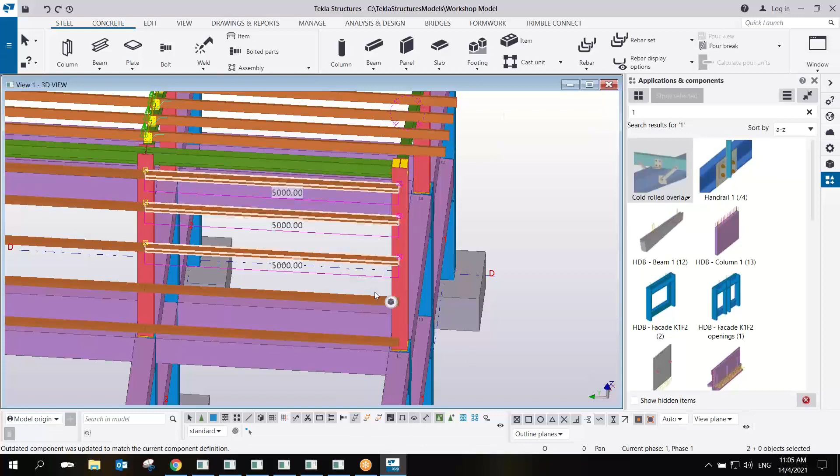So handle, right click, and then move. So from this point to, let's say, 850. Yeah, so this one as well. Move. Okay, there you go.

So if I add this one here, 1, 2, middle, 1, 2. So it also works even with only one beam here, as long as this one is extended. So this one, I can also add that one here to connect the girts, so that will be the girt connection. And then this one, 1, 2, 3, 1, 2, 3, 1, 2, 3, and then 1, 2, 3, 1, 2, 3. All right, so that's how you create the connection for the purlins and the girts.

Now what happens is we can add also the cladding. Let's say, for example, we have a GI sheet cladding, or maybe glass, or whatever, aluminum, we can also add that one. As you notice here in Tekla Structures, we handle a multi-material element, meaning I have the concrete, I have the reinforcing bar, I have the steel. So that one, we can use as a multi-material. In this case, maybe I can simply show you how we are going to open the what you call that.

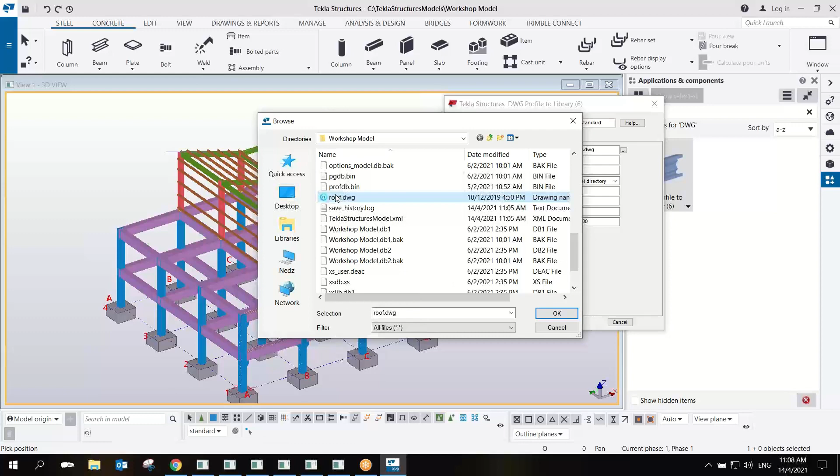So under this one, I can put this DWG, double click the DWG, and then here, parameter. Now remember the DWG group that I've shown you. So as you can see here, I can call that one roof, this one, and then click OK. So I can put a name.

So let's say this one is a TW, let's say TW1000. So that one is our profile name, TW1000. And then under the profile attributes, I will put a question mark because that type is not available here. So I'm going to apply.

So look, if I click from this point to this point, so this one will be the roof from the AutoCAD. So I have now this roof, and then I can use this one as my cladding here in the girt and also the roof.

So I will just simply double click on this one. As you can see now, it is saved already in my library, TW1000.

So what I will do is from here, I'm going to use the beam. So under the beam, I'll put here TW1000, and then I will name this one as, let's say, cladding.

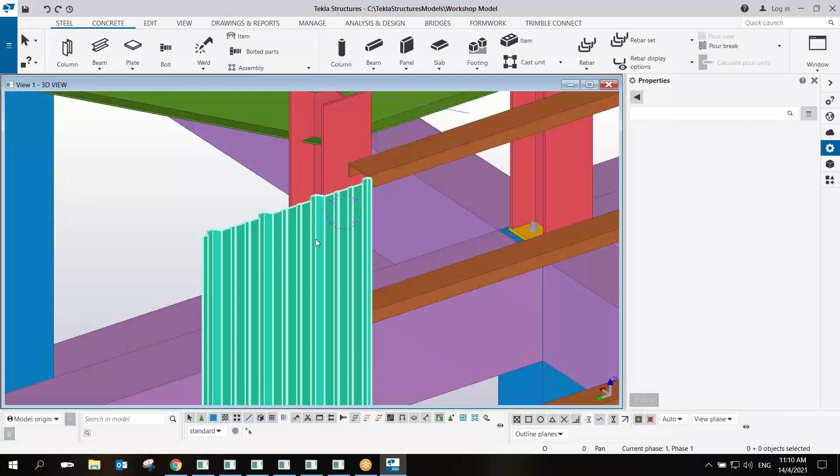All right, so let me just put it this way first. Okay, so from here, 1, and then 2. There you go. So this is the cladding, but I want this one to be on the other side. This one, yes, okay.

So there's already a 10 millimeter. I'll just put here maybe 5 millimeter only. Or sorry, it should be 0 because that will be a self-tapping screw. Okay, so we're okay with this one.

And then here, I can also add this one from this point to this point. So let's say I'll put 45, this one is 4544. I can put that one as 4650, or no, 47.

Oh okay, this one is actually, sorry, this one is wrong. This one must be, okay, just hold on, because this one is wrong. Okay, so I need to rotate this one.

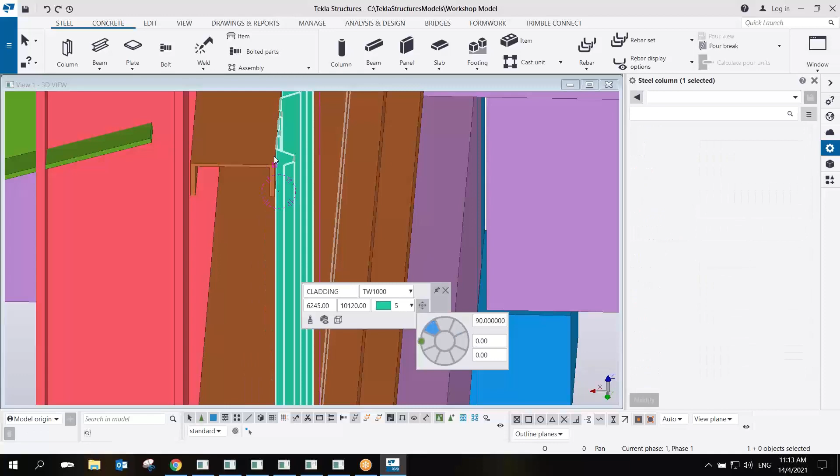Yes, it should be... yeah, 90, and then yeah, something like this. Okay, so this is the correct one, this is the correct one.

And then this one must be rotated as well, to this. And okay, there you go. So this is the correct one.

Actually, this one needs to be 0. And this one, I can move a little bit from this point to this point, let's say 250. Yeah, so this one as well, I can move this one going up 200. Okay, so there you go.

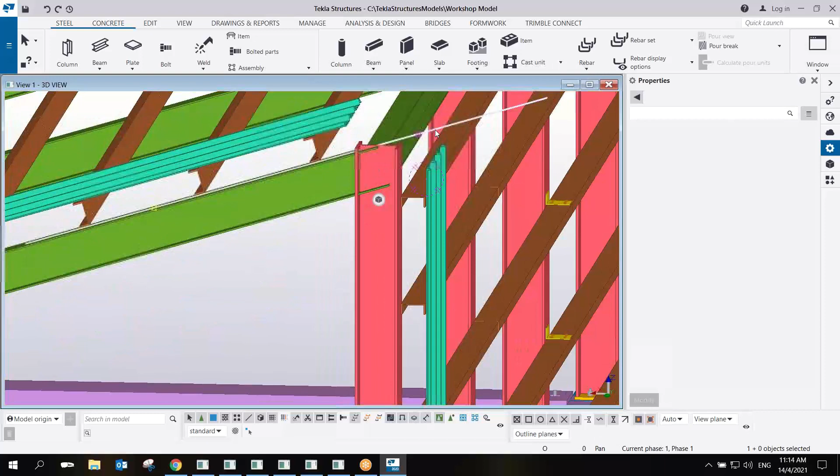So now you will notice that, let's say for example in this case, some of the structure they put something like a trimming here, trimming. So let me try to put a similar thing here, and then we'll make a curve, we'll make a curve roof here.

So what I will do is select or add a construction line. Add this construction line, and also this construction line. Edit construction line. Okay, so that one, so now enable for us to create a curve one here.

I can still use this value, but this time I can use the polybeam. Okay, the polybeam, so same value, but use the polybeam. So in the polybeam, I can just simply click here 1, 2, and then 3, and then middle button of your mouse.

Okay, so as you can see here, I can just simply change this one to yes. Oh, is it? It's some... I think it's not properly placed. Okay, so let me check if I can rotate this one.

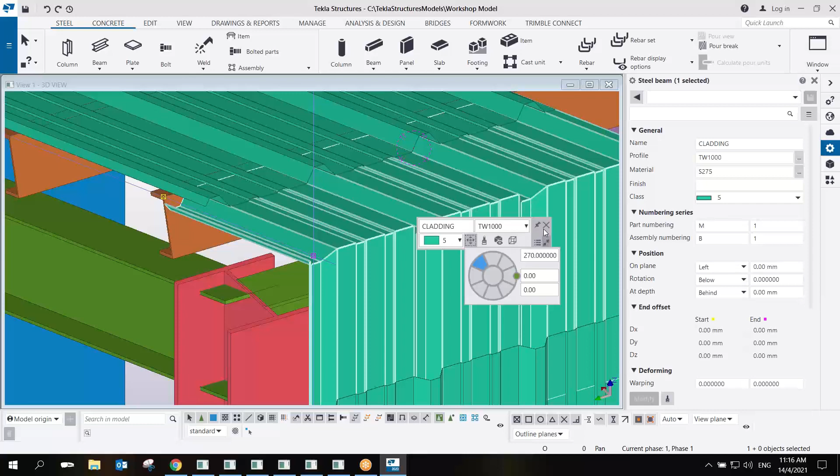Again, so from here, because the yellow is from here, meaning double click again this one and then polybeam. So I can start from here, this one, and then this.

Yes, see? Okay, so now this one is too sharp. I can just simply change this one to rounding. Let's say 300.

All right, or maybe 400. So this one needs to move a little bit. 100. All right, so there you go.

And now all I have to do is select this and then right click, copy, copy special, linear. So from here, okay, I'll go to this side, much easier.

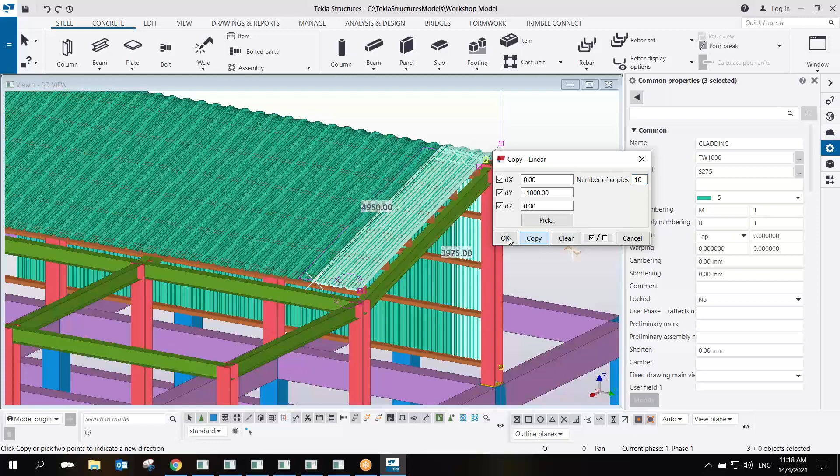I'll save this one. So this time I can run the numbering. Okay, run the numbering. So after running the numbering, if you want to get the bill of material, okay, the bill of material.

Let's say, for example, the bill of material for the steel structure. I can select all the steel structure now. So from here, I can select all this steel structure, and then under this report, you can see here there is the assembly part list. So if I create from selected, look, these are the assembly part list.

So beam, column. So in column, what are the things connected to the column? You have the plates, and these are the columns for the rafter. So as you can see here, these are the things connected to the rafter.

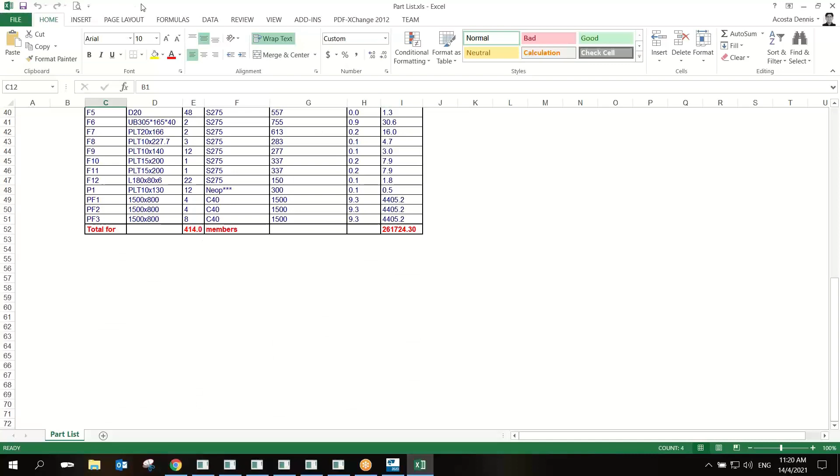All right, and not only that one, if you want to get the number of bolts, since there are some bolted connections, so here under the bolt list, create from all.

So as you can see here, these are the bolts needed inside. So you have a 12 diameter, 20 diameter with a size of 35 length, 45, 65, and 70. These are the quantities, so no need for you to count one by one. Imagine if you're going to count this one by one, it takes a lot of time. So here, in no time, you can get all the information that you want.

And let's say, for example, you want only the number of this cladding. Okay, you want only to get the number of this one and then the details. So under this, still under this report, the part list, and then create from selected.

So here you have the cladding. As you can see here, the grade and then the length that you need. So not only for the column beams, so even the cladding or like what I've said, the bolt you can get.

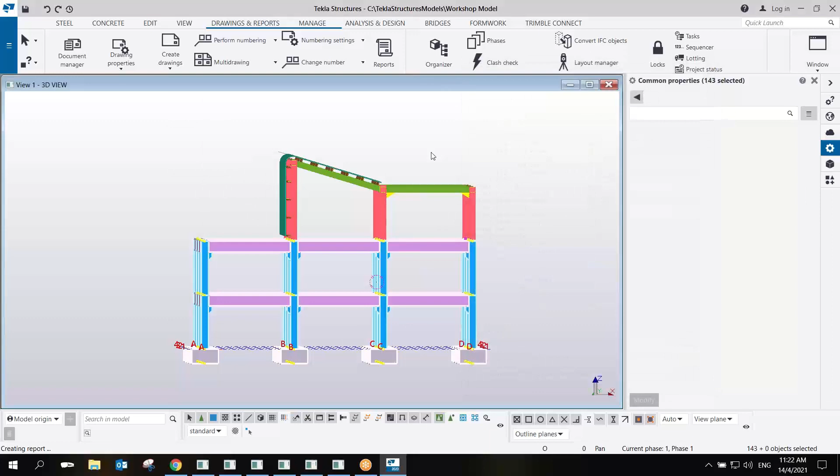So that one is after you create the model, you can get the report. Now, let's move on to the creation of the drawing. So for the creation of the drawing, you don't need to create that one manually.

You don't need to draw that one manually, but because we already have the model, we can create the drawing immediately. So let's say, for example, in this type, okay, so let's say we will create the general arrangement drawing first, or the erection drawing.

So for the erection drawing, let's say I'm going to create a grid one, the grid one, and then the plan at elevation one, and then the 3D view.

And the grid D. Okay, so go to the drawing properties and then select the GA drawing. Under the GA drawing, I'm going to select the standard and load, and then I will type here erection drawing.

So under the erection drawing, I will select the layout. I would say to use the GA and then specified size, A1, apply, and OK. And then under the view, I will use maybe a 1:75, which is the scale.

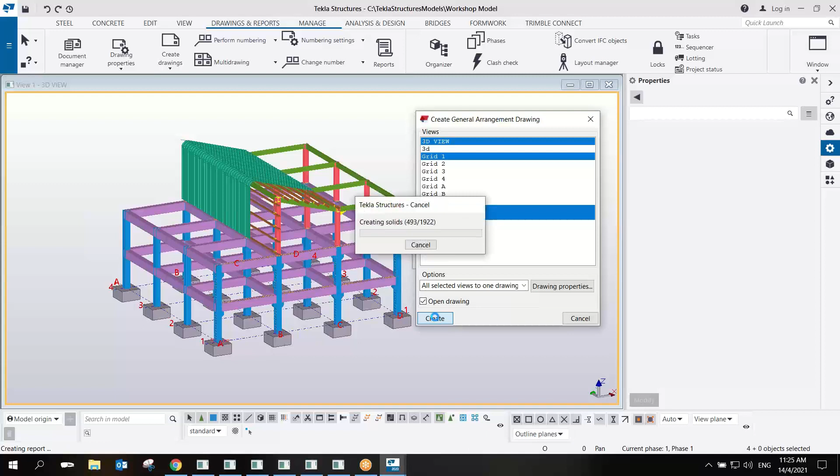So here, the system will automatically create the drawing for us. No need for us to draw one by one. Okay, so you will see here, creating the drawing. There you go. So this is the system created this drawing already.

Now, okay, so it seems that the piece marking didn't work here. So no worry, because in this case, you know why? Because in this part mark, I've noticed that in general visibility in view is none.

So that's fine, because I can easily select everything here in the 3D, and then delete the piece mark here, because we don't need the piece mark in the 3D. So that one is only for our viewing purposes.

So now you will see here, these have the piece mark, or I can say the profile. Okay, so this is the profile here. So it shows the profile. So this D20, because this one is a loose part, that's why it shows the D20.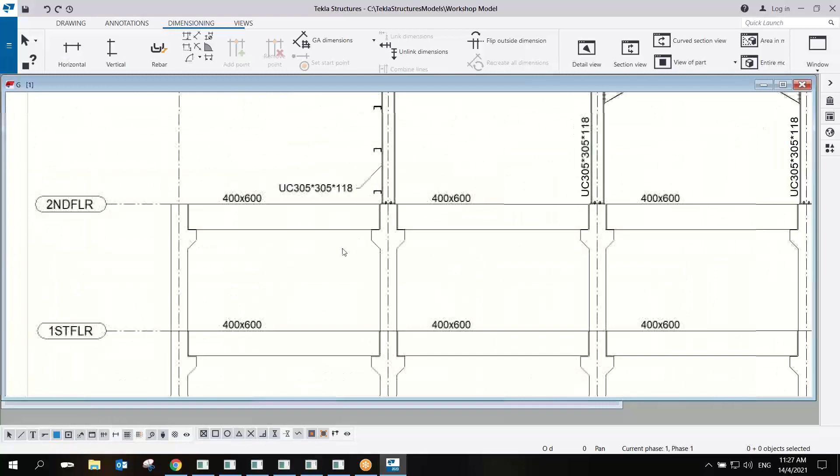I can simply delete this anchor rod D20. Okay, so that should be fine. So yeah, I can delete this D20. So I'll just leave only the profile. As you can see here, all the profile is there. Okay, and the dimensions are there. Okay, so this one doesn't have.

Maybe I can actually add the piece marking manually if you like. Okay, let me just show it to you how it's done.

All right. So again, under this part mark, it's already there, prepared always. Let's say visible. Okay, so there you go. So you have already all the piece mark or the profile in the drawing.

Okay, so now having this drawing, we can also create some information here. Let's say for this one, this. If I want to create now a view, a blow up detail here, detail view. So let's say a blow up detail. So put it here.

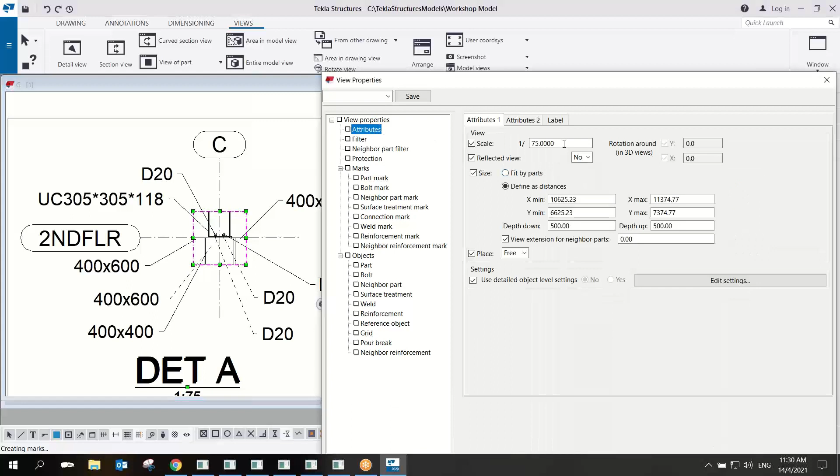So since we're talking about a blow up detail, then we can just simply change the scale here. At the moment, it follows the same scale, 1:75. So again, you can double click on the view properties here, to get the view dialog box here, and then we can change now. Okay, so here, in this case, we can change the scale to 1:25.

So it will be multiplied by 2. All right, or maybe 1:15, much bigger. Okay, 1:15. So in this case, I can just simply maybe we'll delete this D20. Okay, so leave it there.

So now apply and okay. So now once we have this, if you notice here, whatever we get from that particular view, it already captured here, but then we can change the scale. Okay, let me just see why it's not applying. Okay, so apply and then click OK. So just hold on for a while. I think my computer is okay.

All right, so now look at this one. So if I change here, if I extend this one to this, I stretch it here. So look what will happen to my detail.

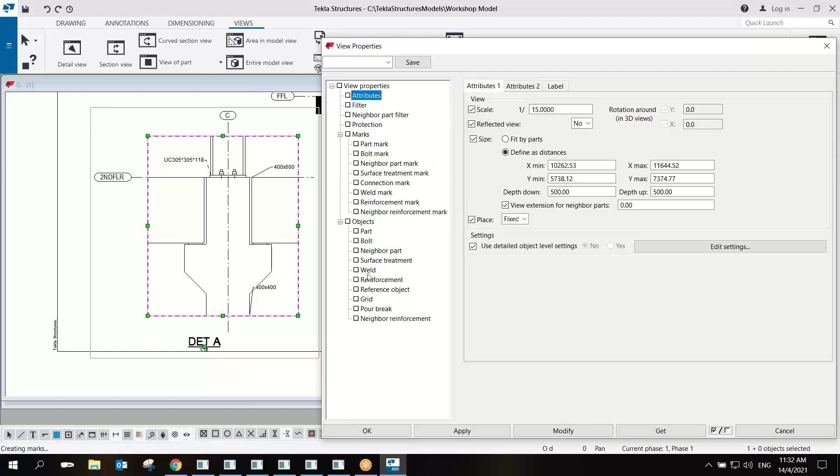Okay, so now I can use my reinforcement here, and then visible, then put double lines, and then modify. So you can see here it will show the reinforcement now.

And then we can now use the section view here. Section view. So let's say this is the range of the section view, and then you put it here, and look, this is the section view.

So as you can see here, even though you're in 2D, you don't need to draw the details that you need to see, but you can just simply make a detail view or section view, and you can also add some more information. Let's say, for example, dimensioning here. You can add dimensions from the center. So dimensions here.

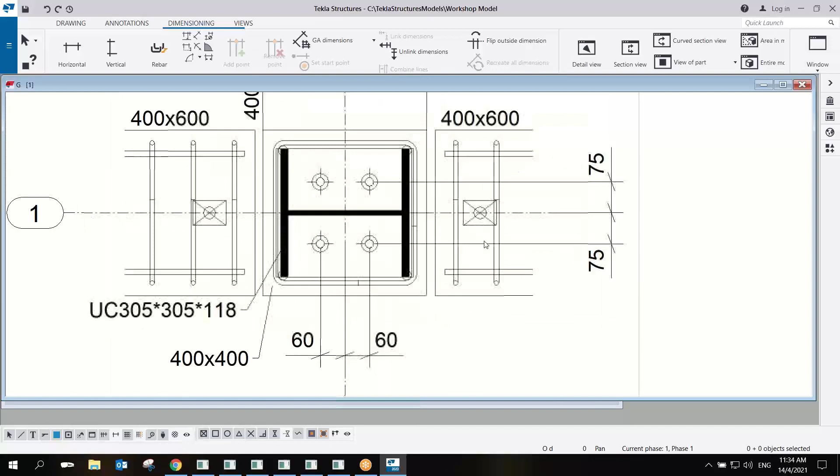So something like this. Let's say, for example, let me just get one rebar here. If I add mark properties, this one is 34 pieces of T8. Now if you double click on this one and change, let's say add a pull-out picture, if you want to see the rebar here with the dimension, click OK and then modify. So see here, this is the graphical representation of that reinforcement.

So this is how you create the general arrangement drawing or the erection drawing. Now let's move on to the shop drawing, the fabrication drawing, which is the most important part, because the details it will give you are more detailed. This is what the fabrication will need.

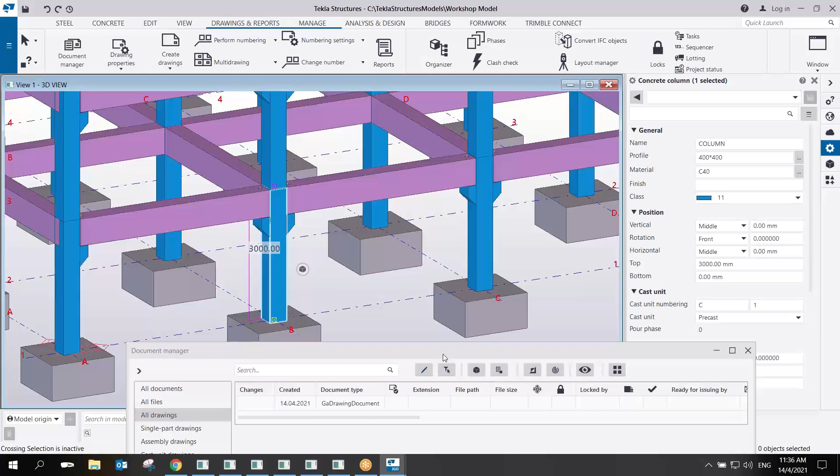Okay, so let's start with a column. I'm going to the drawing properties and then cast unit drawing, and here let's say rebar, apply, and okay. So this time I'll go to the document manager. If you look at the document manager on all drawings, I already created the drawing document here. Now I'm going to create the cast unit drawing. Open this. Again, I did not do anything, but the system created the drawing for us.

Look at the drawing that the system created for us. See this? Automatically it creates the drawing, the fabrication drawing, with all the dimensions. See, with the bar bending schedule as well here. Look, there is a bar bending schedule and even the graphical shape code here.

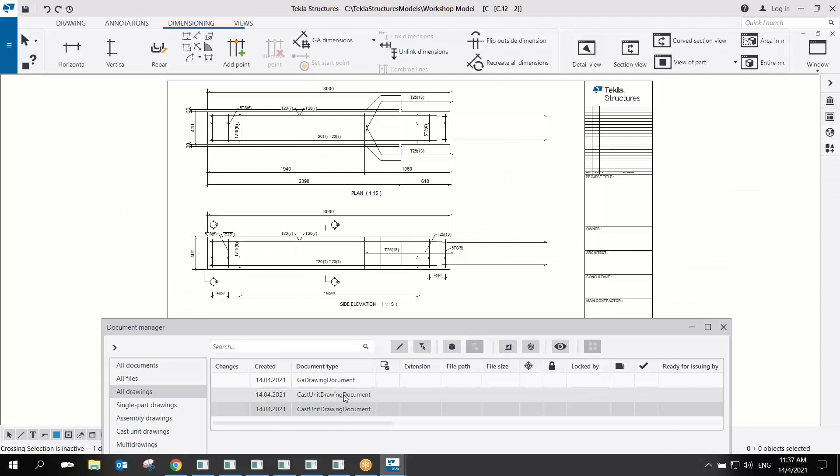All right, so let's try the beam. I'll close this one and let's try the beam. So beam, select this beam and then create drawing again, cast unit drawing. All right, so here you can see the cast unit drawing here. Again, this one is for the beam. Sorry, that one's still the column. This one, the other one, okay, so this one is for the beam.

So as you can see here, you have all the T8, 1T20, 2T20, and there's an opening there. Okay, so this presentation can be changed if you like. At the moment this is the default one, but this one can be customized. And for the steel, okay, for the steel,

I'm going to create a drawing for the column and for the, let's see. Hey, where's the, okay, I close the view. So let's say the column. I'm going to create the column, this column, and then the rafter. So maybe I'll use the drawing properties and then assembly drawing. So I'll call it maybe beam with parts, apply and okay. So select these two and then create drawing, assembly drawing. If it is concrete, we call it cast unit drawing, and if it is steel, we call it an assembly drawing. But it's similar, the only thing is

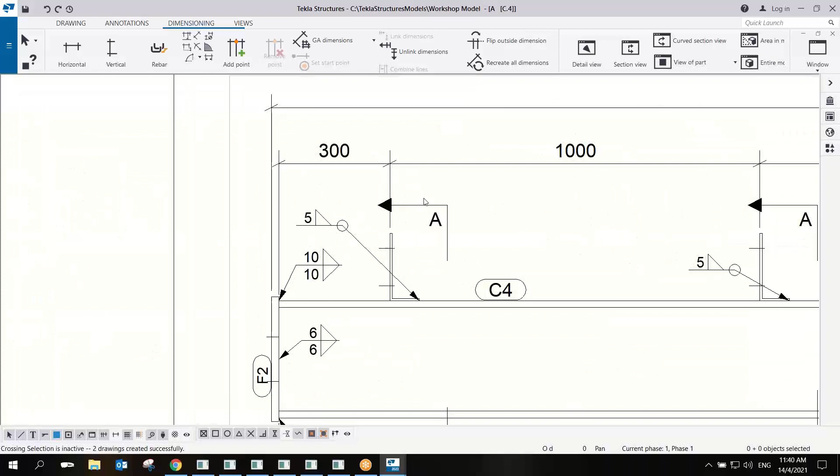Quite nice because all the dimensions are there. As you can see, dimensions, the location of the clips, and then you have the welding. Actually, this welding I can clean up because there's a lot of welding showing. You don't need to show all the weldings because if you have some general notes for the welding, it can be done as well. But this standard welding we can remove.

Okay, so under this, where is that one? Under the weld mark. Welds none. Modify. So we just turn off the welding.

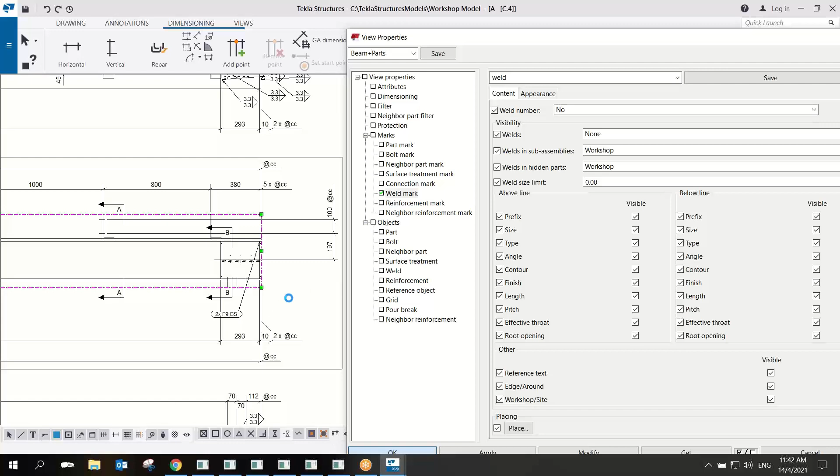So this is the column drawing. Now let's move on to the beam drawing. If you notice here, you have the detailed drawing, the cutouts of the base plate, the stiffener, the fitting dimensions, the gusset plate. So all the details are there. Imagine you don't need to draw that one by one. If you're using the classic way of detailing, it will take a lot of time. But in this case, Tekla Structures will create the drawing for you automatically.

Similar thing with the rafter. As you can see, you have the location, the dimensions, and here this is the bill of material. So that one is how Tekla Structures works, the basic one.

Then if you like to use this model in your presentation, you can change this one to a perspective view and then modify. So this one is the perspective view. Once it's in perspective view, you can just simply press Control F and make a walkthrough.

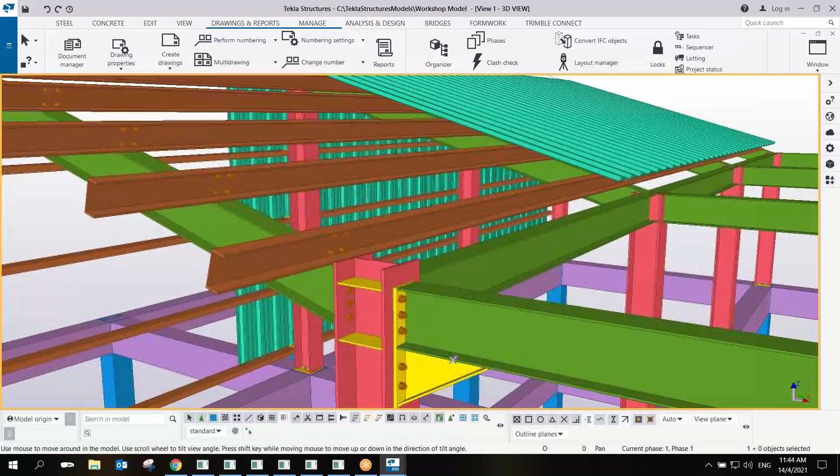So there you go. Also, like what I've said, if you want to have a multi-material, let's say you want to have a wall made of wood, I can use the concrete wall here. If I click here, this is a wall, but I can change this wall to wood. So how to change this one to wood?

By simply changing the material to a timber, and then left modify. All right, so if I may do the opening here, polygon cut, select.

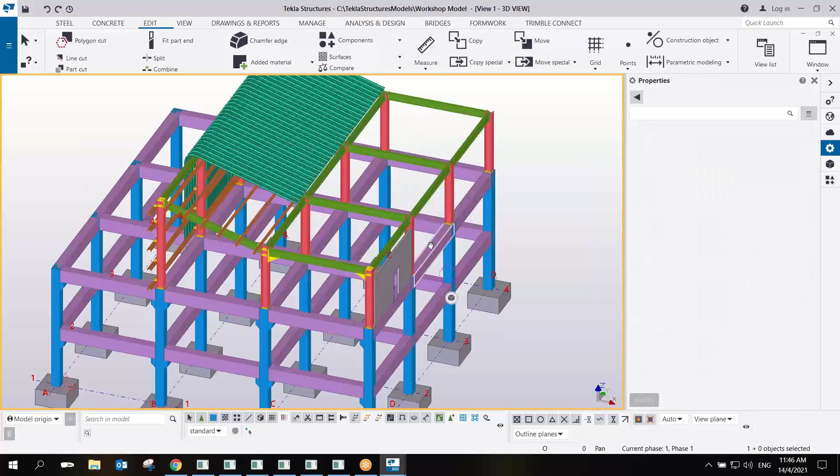Polygon cut, select this one. All right, so that one is for the wood. Now let's try if that one works, if it shows the wood part.

Under this view, we have this visualizer and then visualize material type. If I go to timber, where is the timber? I cannot see the timber one. Timber, okay, that one is timber. Click OK. So now if you click visualize, visualize all.

This one will be rendered to the point that you can do some presentation. As you can see, this one is steel, this one is concrete, this one is steel, and this is timber. So as you can see, you can have this presentation.

If you like to do some walkthrough, I can make it. We can do something like this. Also here you can change the shadow and the lighting.

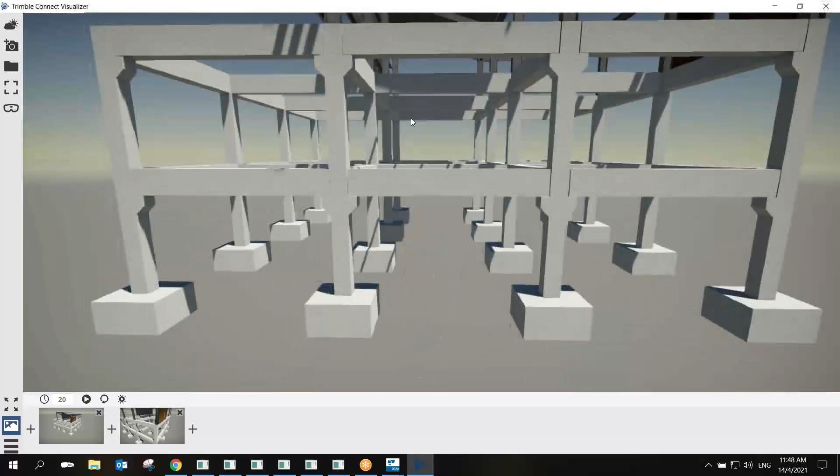In this case, if you like to have some walkthrough, you can just simply click the plus here, and then zoom in, and then plus, change the view, zoom in, plus, zoom in, plus, plus sign. So here, plus, plus, and then zoom in again, plus, and there you go.

So plus. Once you click play, you can record a video and then use this one for your presentation to show your client, this is the model that you need to use.